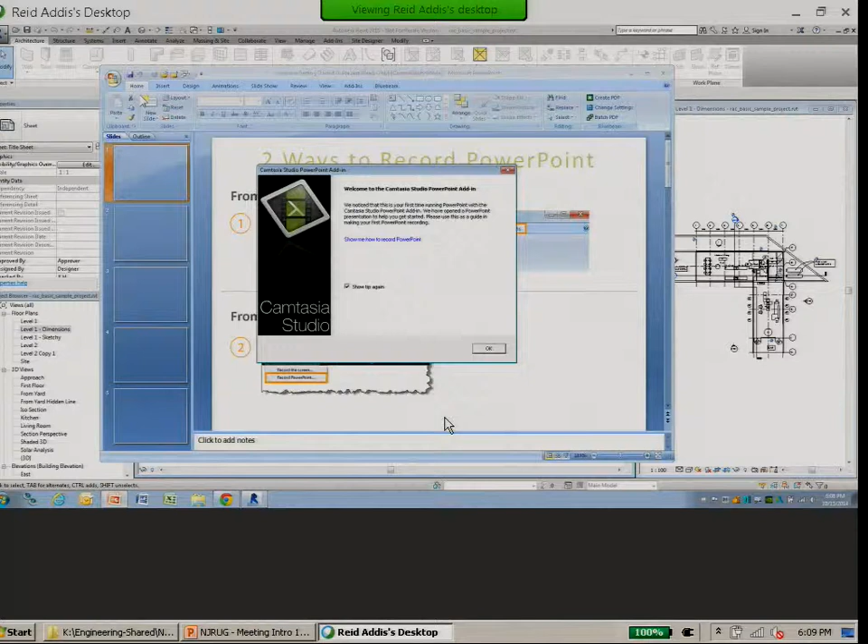Okay, let's see if we can get out of here. Is that one? Or not. And away we go, there we go. So it didn't like two PowerPoints trying to start up at the same time.

What the heck? So I'm Reid Addis, I'm a registered architect. We're dealing with Revit architecture, that's R-A, right? So coincidence?

I'm not sure. I was going to also start by saying that I'm probably the oldest guy in the room. I saw a couple other gray hair individuals. I'm 63, so I don't know, do I win? Do I or not? I'm close? Okay, so I like to introduce myself as the oldest guy in the room. In fact, I'm probably older than most people's fathers. Don't tell me I'm older than your grandfather, because that really hurts me.

I've been using the software a long time. I've been using Revit on and off since it was first introduced by a bunch of really dedicated people in Waltham, Massachusetts. When I went up there in 1999, I thought they were all out of their minds, right? All the drawings in one file, people sharing the same drawing, this was on machines that could barely do minor calculations. But Autodesk didn't think they were crazy, acquired them in 2002, and starting around 2006 it became a very viable product, the 8.1, and I've kind of been playing with it on and off since then.

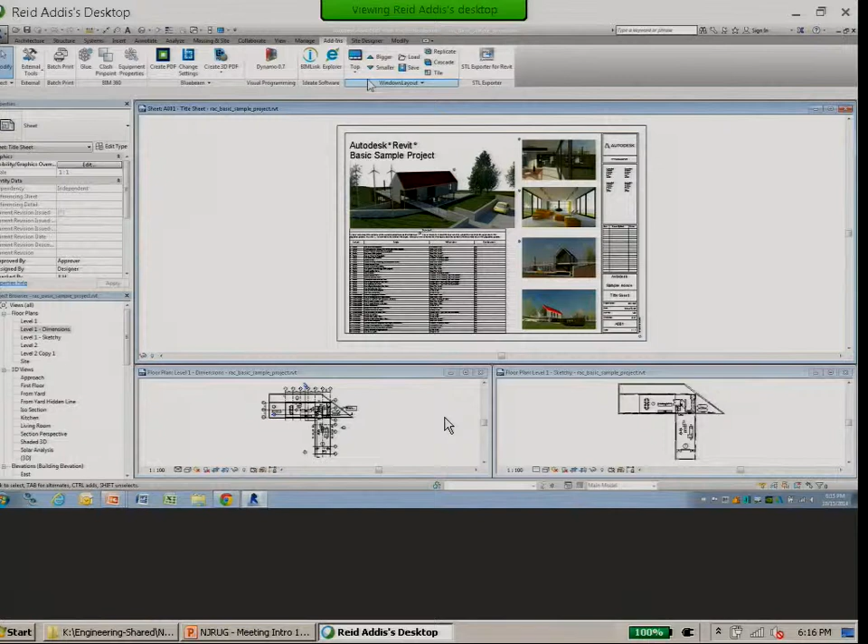Notice I'm able to quickly decide what I like. I can come over to add-ins and decide I'd like things a little bigger or smaller, or put things across the right or across the bottom. This is just the sweetest product, and it's free of charge. It's called Palladio X - look for it on the Apps Exchange store, the famous Italian architect with an X after his name. If you get approval from management, I highly recommend taking a look at this add-on.

Anyway, the sketchy lines feature was basically a visual graphics enhancement. Let's see if I can demonstrate this - does that show up on the screen? No, that doesn't show up. Okay, so there's this visual enhancement.

Let's see if this works - yes. Over here you can get to the graphic display options, either by clicking the edit button here or clicking down here, though it's a little faster to click at that particular point. There's a new section called sketchy lines, where you can enable it and adjust both the jitter and extension features.

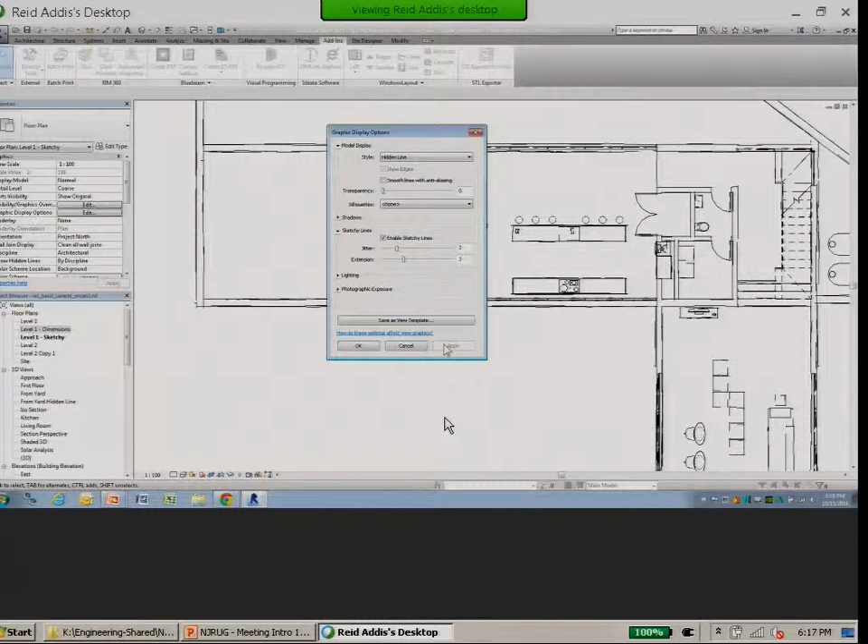You can play with these settings, and you'll notice it looks like after Warren's been in Starbucks a little too long. But you can adjust it to really what you like. I kind of thought, hey, sketchy lines, who really cares about that?

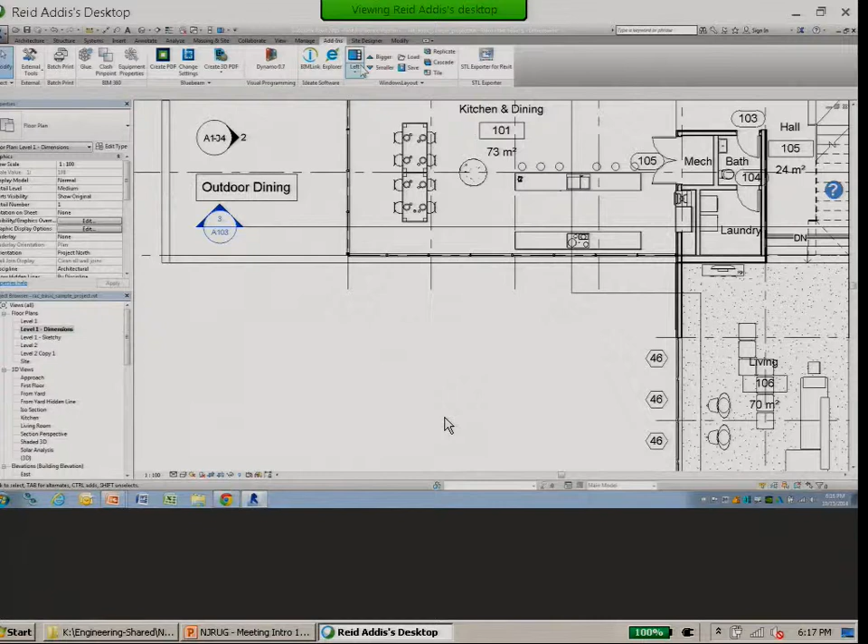But one of the things that's interesting about doing those kinds of drawings is taking a drawing that looks like this, and turning it into a drawing that looks like this instead. The idea is this gives it a less formal quality that you really can't get inside the Revit product itself, or even external to it.

When making presentations to clients or zoning boards - and I've presented to lots of different zoning boards in my career - a lot of them get persnickety when your drawing looks like it's 90% through CDs, assuming they're going to rubber stamp it as it goes through. So instead you can take your drawing, run it through sketchy lines, print that out, and take that to your presentations, or do the same for your client.

I guess the best line I ever heard about that was back when it was in AutoCAD. There was a guy in an office who used to do these nice sketchy line renderings by hand. I told him, look, I can now take my drawings and do sketchy lines. He said, oh, so you have a $6,000 product now that does what I do with a pencil.

I said, yeah, I guess so. But I can change my view faster than you can and get that sketchy line view. So sketchy lines is kind of a nice new feature.

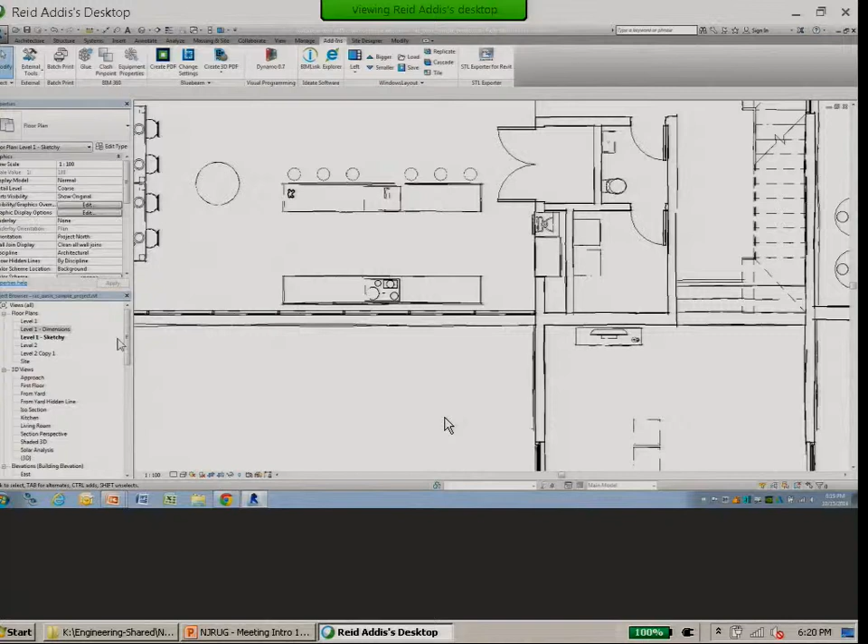Let me maximize this and take you into one of the 3D views. There's my kitchen view as a rendering. You now have the ability with ray tracing - again, one of the items at the bottom of the screen in display options for ray tracing. Ray tracing will start up, and I think they've just improved the performance.

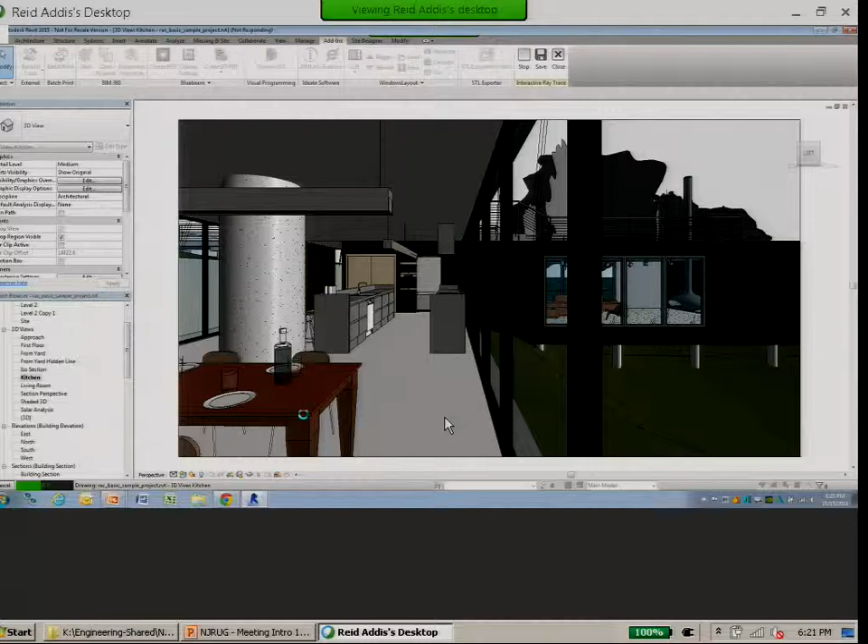The idea behind ray tracing is that it's going to bounce light around in your file, and it will continue to bounce the light forever. So you get this interactive rendering. It's progressing along at the bottom here, thinking about it. And there we go - it starts this interactive process of rendering the image, and ray tracing really never stops.

So at some point you can basically say you're done with that. It's not quite the same as rendering the image, but it gets you a fairly high quality material rendering without having to go through that rendering process and wait for the screen to finally update.

When you're done, you simply pick stop, and then you have the ability to save that into the file, export it, or simply close that out and move back to one of the other modes for the file. Okay, let's go on to the next one.

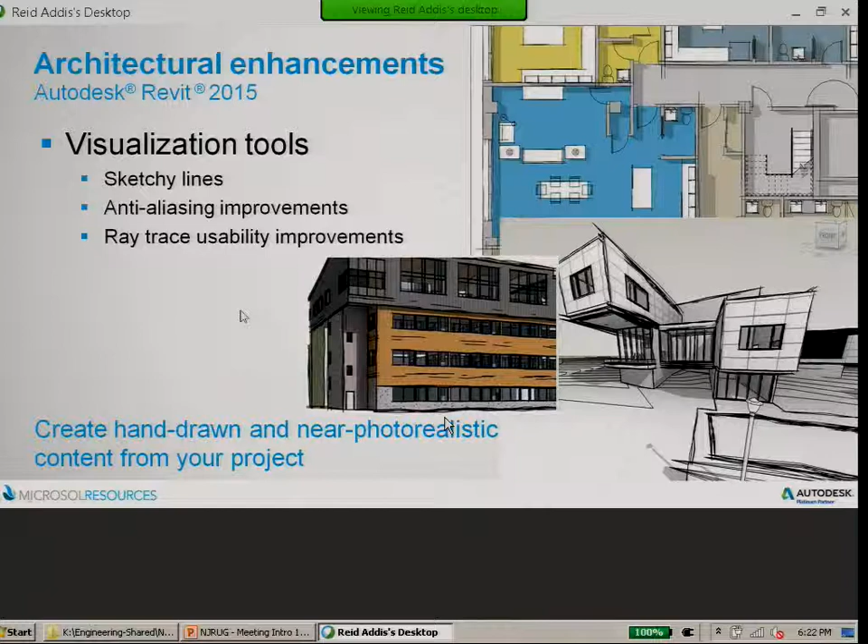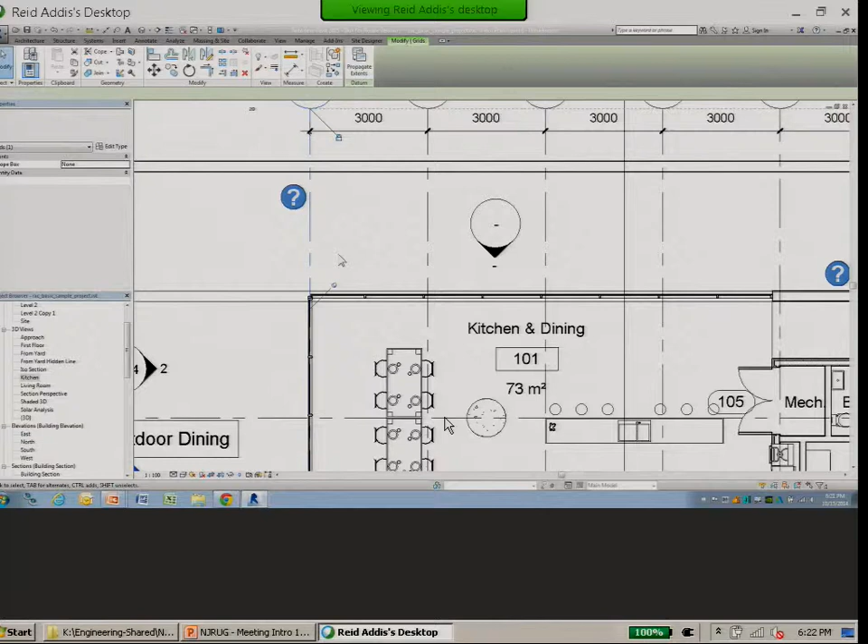With column grid lines, if you choose to pin the element - so now I've got that pinned - if you choose a couple of these and then go to delete them, it's not going to delete the one that you have pinned. That's kind of a nice feature. Now you don't have the ability to lock a layer like you do in AutoCAD, but when you've pinned the element, at least it's not going to delete it on you.

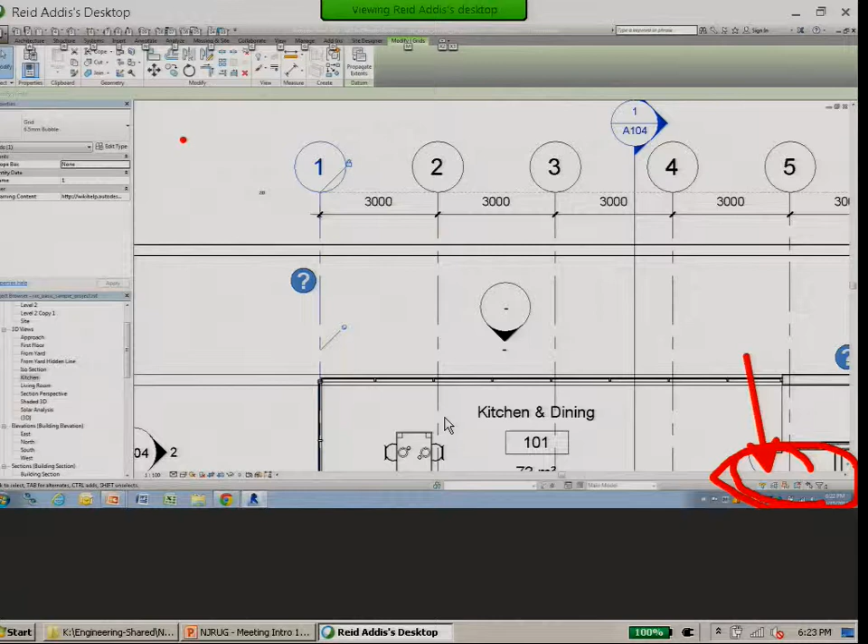The other thing you can do with pinned elements - this was added in the previous release - under the Modify button you also have an option to choose whether or not to select pinned elements, and that's also available down at the bottom of the screen. There are some little icons here, and you can do the same thing down here that you can do up under Select, choosing to not select pinned elements.

Another nice thing from the previous release you may not have noticed is select elements by face. If you're working in a drawing and trying to get this floor slab, you can't pick it directly, so you tab around trying to find the edges, same thing with ceiling grids. Now you can say select element by face and pick that surface directly. It's a really nice feature, but also very deadly if you're doing a window or crossing selection, because the first thing that happens is you pick on a face, and then it gets selected and moved or deleted - so just be aware of that.

So that's a slight improvement to the pinned element feature.

Family parameters. This is one that really works for everyone. You now have the ability to change the order of family parameters.

For anyone who's ever created any kind of family, you start putting your parameters in and you sort of hope maybe they'll go in alphabetic order. They don't really do that. Sometimes they sort in really weird ways. You're like, oh, I just thought of a new parameter to add, and it adds it in a totally different section, so it just becomes a nightmare of trying to find the right parameter.

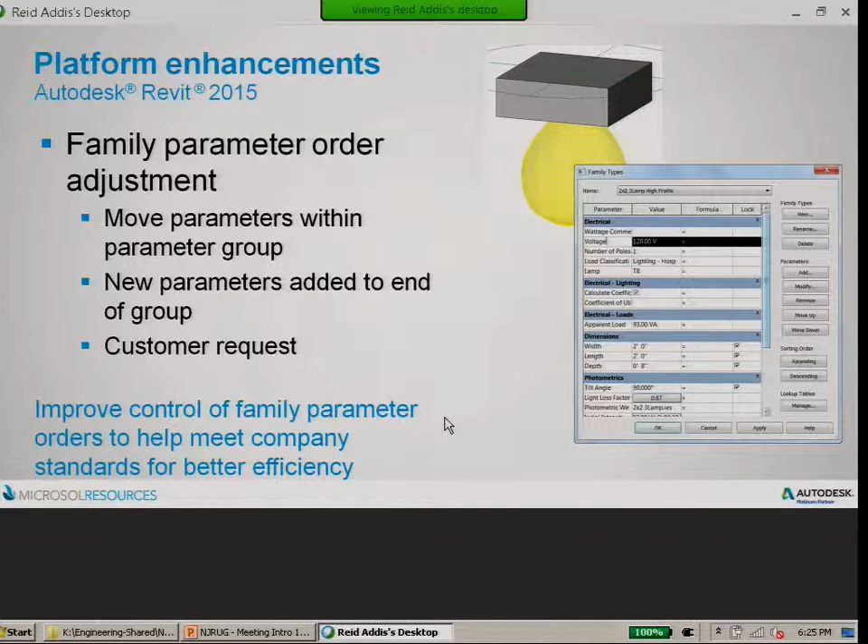You also have the ability to add help information to the parameters. Let me see if I can show you that. Let's look at a door here.

So with a door, looking at the type parameters, I'd love to zoom in for you, but it doesn't seem to pick it up. Darn, okay, so I've got the zoom feature on my laptop, and it doesn't pick it up here.

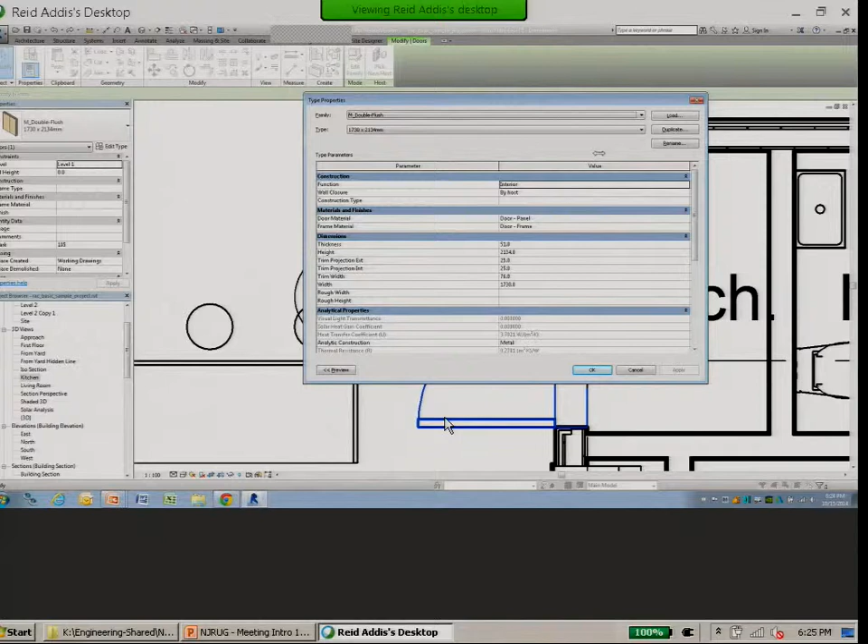You'll notice that for your door, I've got thickness, height, and then way down here I've got width. Most architects, we like it so that it's width, then height, and then thickness. So between height and width, I've got all this other stuff in there.

So one of the things you can do now is if I go over to edit the family and take a look at the properties, I'm able to pick the width option, and now I have move up. So I can actually move that to the top of the list, and move height next. So I've got width, height, and thickness.

That is really, really cool. If you've never done families, it's like, big deal. But if you've done families, or even tried to deal with families in your files, this is a huge improvement. I'm going to say okay to that.

I'm going to show you a little sneak preview of this guy here. We'll come back and talk about that in a minute. But I'll go ahead and load that into the project and overwrite the parameters.

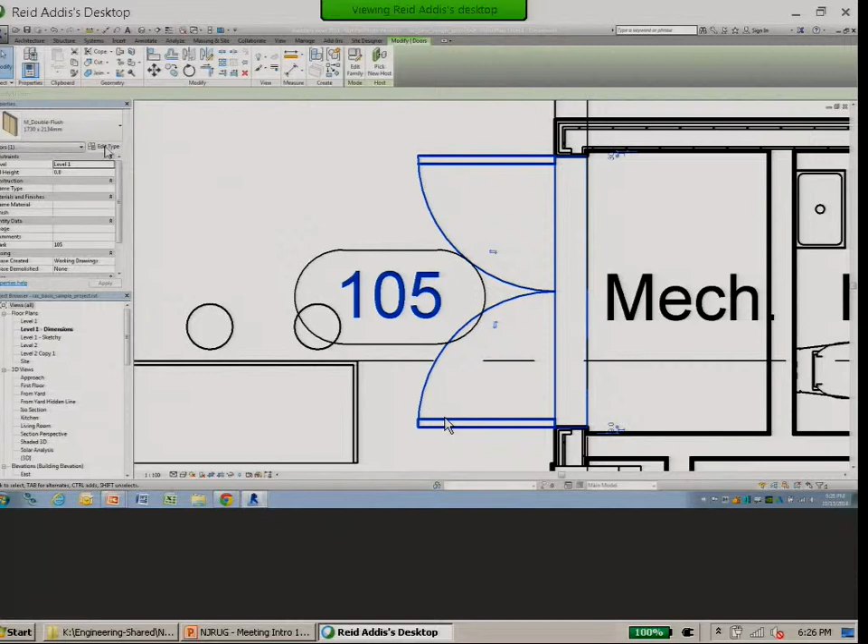And now if I pick that and go over and take a look at the edit type, I now have width, height, and thickness. So it's great—you can take these existing files, and now in 2015, you can open up and reorder the parameters really any way you want.

I know it seems like Reid is easily pleased, but I'm not really. That's really a pretty big item.

Okay, what do we got? Tooltips in family parameters—that's another thing you can do. As you're adding a parameter, you'll notice down here, I won't take you through that, but you've got the ability to add a tooltip. So why would you want to add a tooltip?

Well, you'll sometimes have some kind of formula in there, like half stair width, or beam minus coping, or something of that sort, and you're really trying to figure out what the person who created that was really thinking. Now you can add a little tooltip that explains, up to 250 characters, what that particular parameter was all about. So that's kind of a nice feature.

Okay, where are we going here? So there's a new feature for consistency with text leaders for our parameters, for tags, and there's a new parameter for elevation at top. One of the items people wanted was to be able to, instead of having it to the left or right, put that information instead of underneath the word 'level' over here, to actually add the parameter over there.

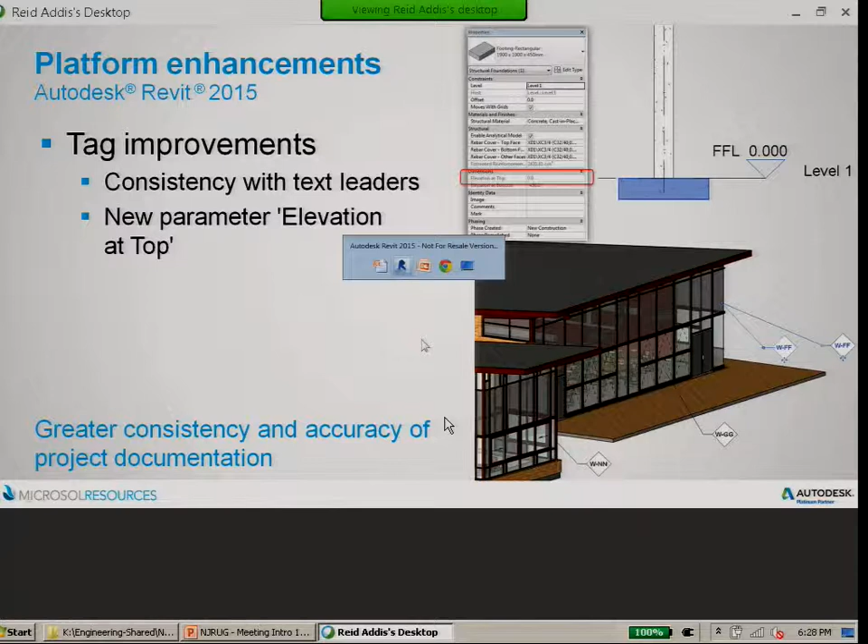One of the tag things had to do with dragging out your tags and trying to have the elbow kind of come with it. Let me see if I can work with this. Let's see if I can take this guy and add a leader to that. So let me grab and move that over.

When we moved that around in previous releases, there were kind of issues with the elbow not staying exactly where it was supposed to, the same way it did with a text leader. Again, doesn't seem like a really big item, but it's a nice fit-and-finish item that was added in this release. Just take that off and move it on over. Okay.

So enhanced schedules and material takeoffs, views on sheets, duplicate views, and view references. Let me show you what goes on with the enhanced schedule and material takeoffs.

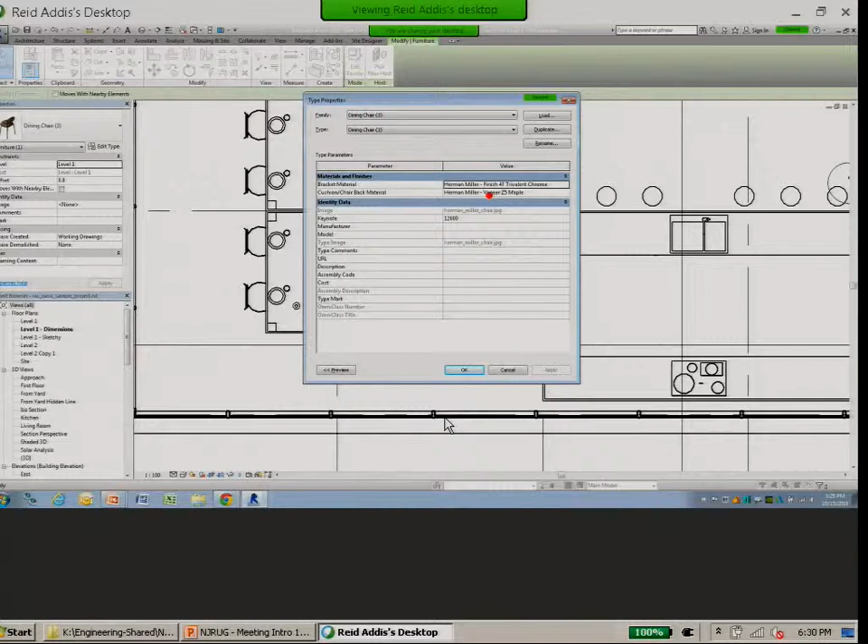In the schedules now, you have the ability, for instance with this particular chair, if I go over and look at the type, you'll notice that I have the ability to add a couple of different images. One is an image, and then there's a type image that you can add. You do that basically in the family file, by opening it in the family editor and looking in the properties.

One thing that threw me off: when you get to 2015, you get this image field, but there's no identity data visible, so where do you add that? I searched and searched, and it turned out all that stuff was under identity data, but hidden because an arrow was pointing down instead of up. By default they hide all the parameters. So if you're looking for where all this stuff is, just click that little button and it'll help you out.

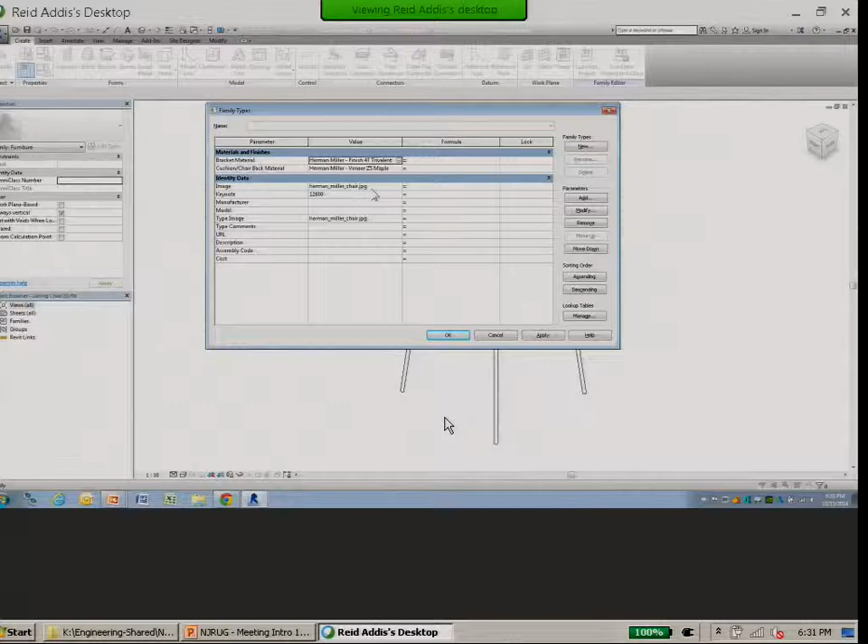You also have the ability to save images. All I did was go to Herman Miller's website and download images of their chair. Then there's an ellipsis button that lets you choose the image you want. There are certain restrictions suggested on the size and pixels of that image, and then that's something you can schedule.

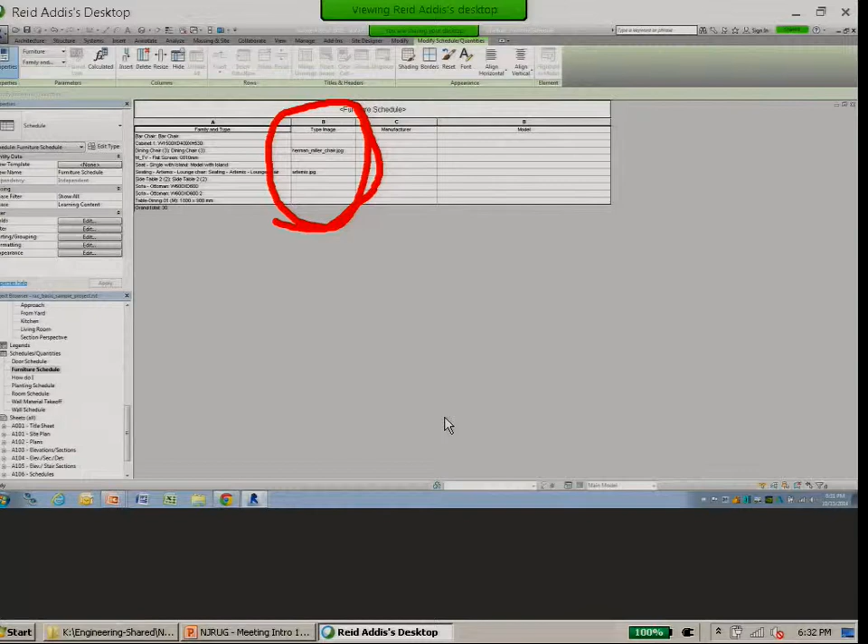Let me go ahead and close this, so that can be scheduled. If I come down into the schedules and go to the furniture schedule, I have those listed here. If I look at the parameters, one of the parameters I added was type image, and you might think that's not a very interesting image, right?

It doesn't actually display the image in the schedule itself. It only displays the image once it's finally placed onto a sheet. So when you finally get that schedule onto a sheet, the image shows up.

That could be useful for people doing interiors work. It could also be useful for mechanical products if you're trying to show a certain valve, fitting, or structural connection. You have the ability to do that now, and it's as easy as saving an image as a PNG file of a certain size and adding it to the family's parameter. I found that type image works better than image, so set it as the type image for that family, and it comes through when you place it on the sheet. Very nice.

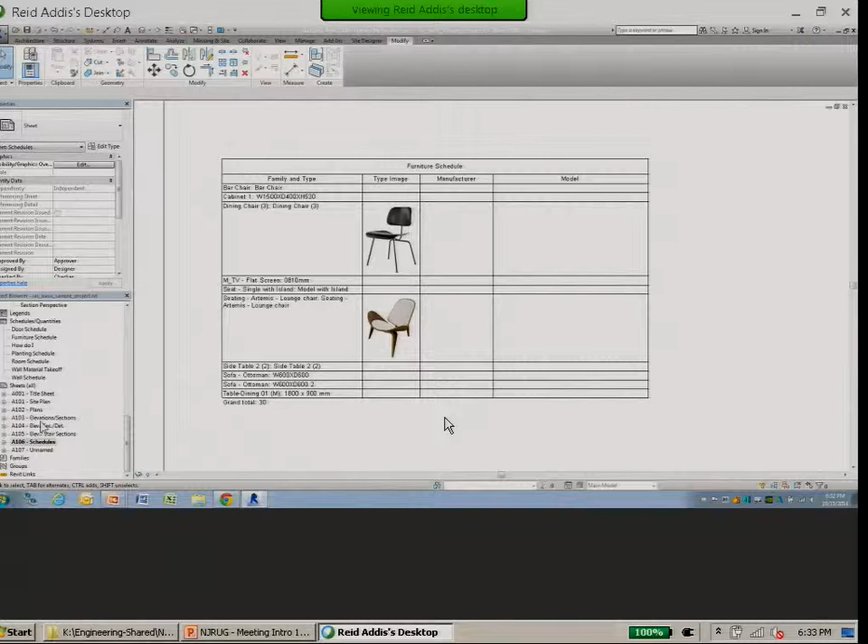Now, views on sheets. Let's go over to our sheets. One of the things added in a previous release was the ability to double-click inside one of your views to activate it. But in the past, to deactivate the view, you used to have to right-click and pick deactivate view. If you're not a right-click person, the answer is always right-click if you can't find something, right?

New users will call up and say everything's grayed out, I can't do anything, I don't understand—oh yeah, you have to right-click. For those of us from the AutoCAD world, I compare these to viewports on sheets, and in AutoCAD you just double-click outside the viewport. So why can't Revit do that? Well, Revit does that now in 2015. It sounds like, what's the big deal, AutoCAD had that for years, but it's actually a big deal at this point.

So you have the ability to just double-click inside or outside of a view to activate or deactivate it. Another thing—I know it sounds picky, but let me get rid of this over here. I wish it would zoom on my screen, but it doesn't, so we'll deal with it. Over here you see I've got Level 2.

I'm going to delete this copy. So we have Level 2, and if you wanted to make a copy of a view, you would right-click and say duplicate view, right?

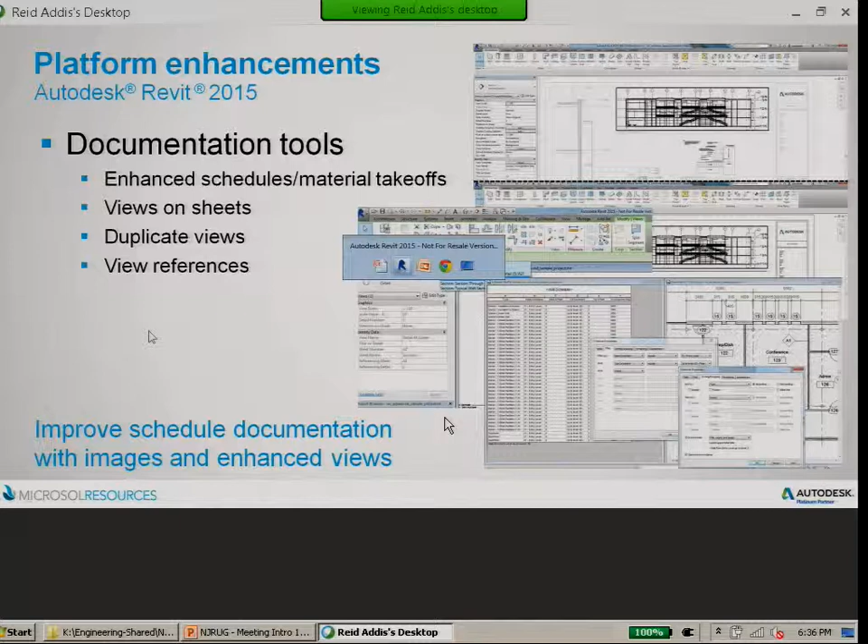Let's come back to here - images and schedules. Oh, I did that already. So, okay.

Couple of minor things - assembly codes are now available. Assembly code settings are now available if you're actually using those for working with, let's say, either scheduling or tying into external programs that produce specifications.

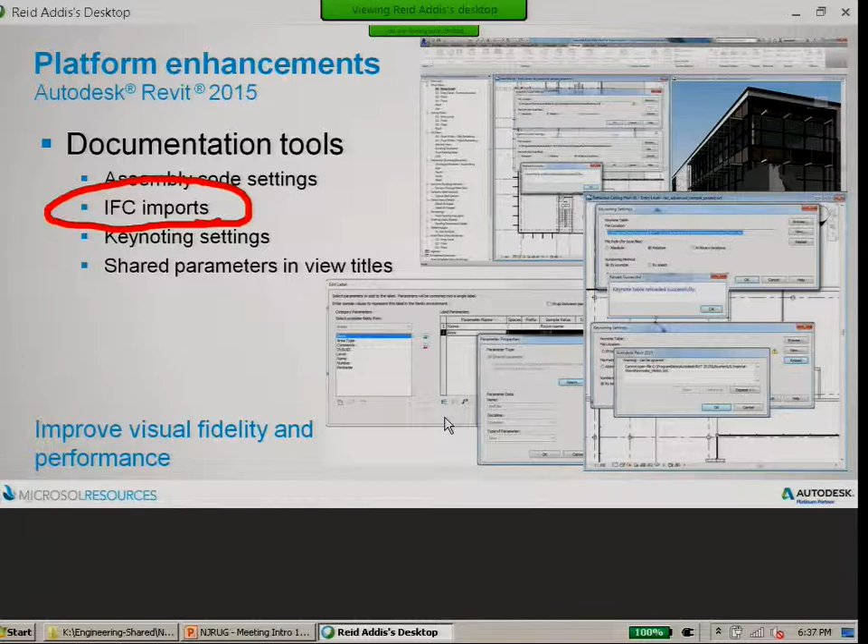Another thing you can do is actually import IFC files now. I don't actually have an IFC file, but instead of linking it in, you can now bring it in just like you can bring in a CAD document. Now, you weren't able to work with phasing - someone asked, well, if I bring that in, am I able to do phasing? I think you'll see in a little bit that there's some abilities - it's either that or work sets. You have the ability to do some additional manipulation in the subscription update.

Some changes in the keynote settings, and you can now have shared parameters in view titles. So you've got those particular changes as well.

Hidden lines - I haven't decided how I feel about this one yet, but I'm going to show it to you. There's some neat new things they've done to help improve, potentially, being able to see through your model, but not have it be in hidden line mode.

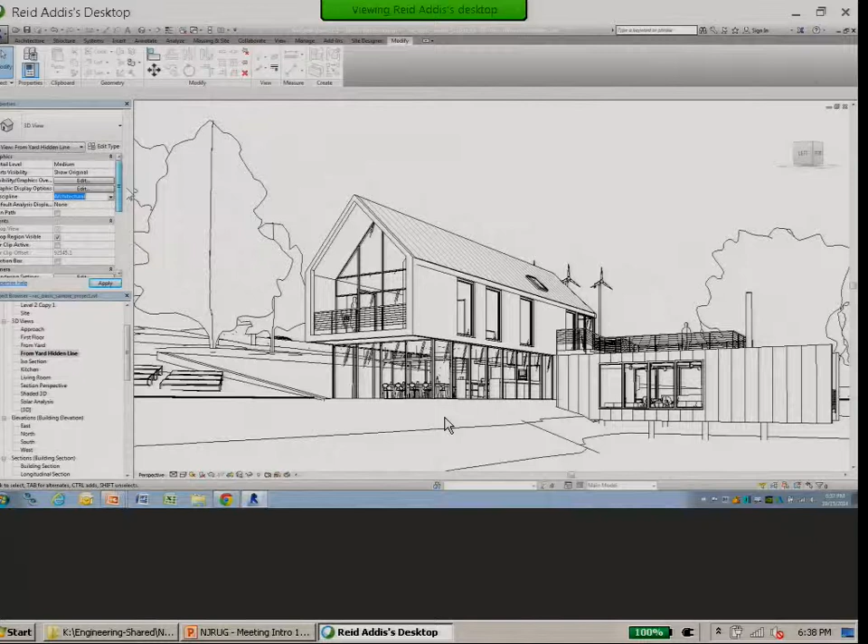Let me take you into a view we've got. I think I've got an isometric in here. Can I do this one? Let's see what we got - architectural. Let's come down to... I'm not going to be able to do it in that particular view. Let's do it. Let me get to an isometric. I'm not going to get to an isometric. Let me go to my 3D view.

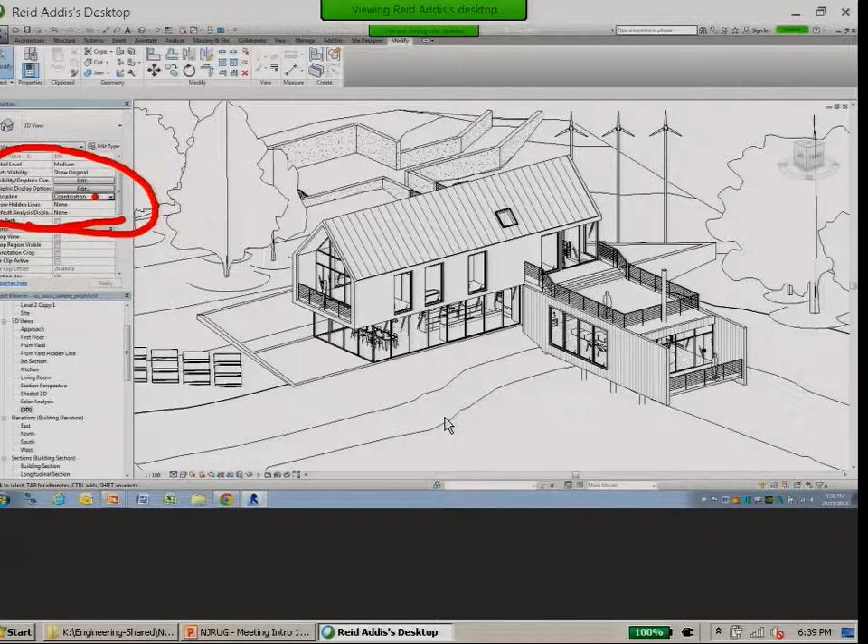There we go. Okay, so in my isometric view I've got some additional options called show hidden lines and discipline. Let me circle that. So show hidden lines - the discipline is currently set to coordination, show hidden lines is currently set to none. You have the ability to control that to say, by discipline.

When you do something like that, you can pick an object - let's say this particular roof - and then on the view tab you have the ability, well, let me turn on show hidden lines. I can pick the roof, and then I can pick the item, say, this particular wall there. Did I get that? Well, I'm set to coordination - let's see if we can do it architectural. Okay, so let's say pick this.

Yes, let me pick this, and then let me pick this wall. There we go. So you're now seeing, architecturally, you can see that wall through the roof. Or let me see if I can pick this wall here, and then pick this interior wall, right?

So you can start to do those sorts of things where you can selectively choose which ones you want to show. You can also choose to remove the hidden line, basically reversing that same process to remove items one at a time. Or you can simply say, just show me everything, and pick all. Then it shows you everything that's hidden by everything else in terms of the disciplines.

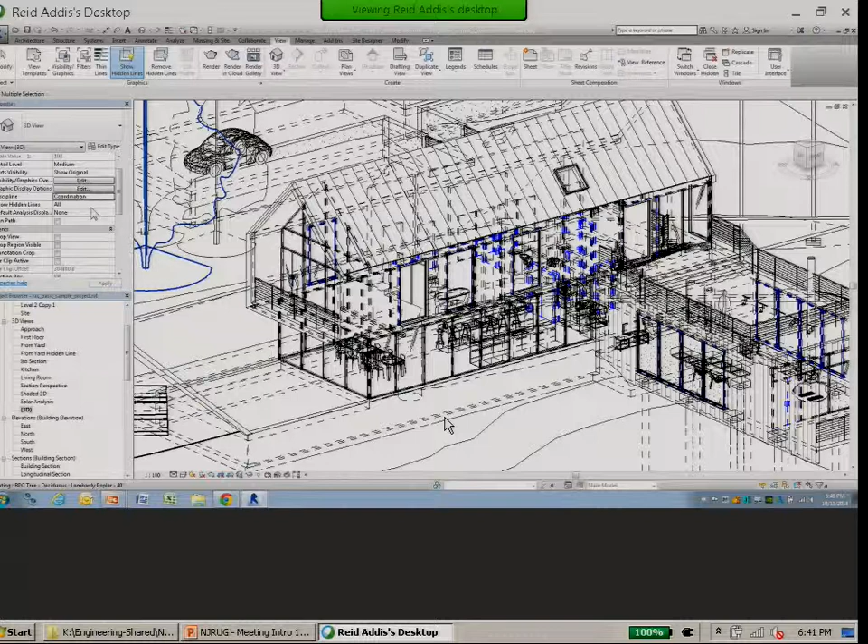Let me see if I go down to coordination, right? That one isn't quite as useful as it could be, but if you do by discipline, it gives you that ability to selectively choose the elements that you want to have show through. I haven't figured out a complete use for that yet, but I'm sure there's something.

Let's see if we can get back into the PowerPoint. Revision improvements - I'm not gonna go through all of these.

There is the ability now, in the past you really weren't able to delete revisions, and now you have that ability. So there's been a button added for deleting. There are more tools for sketching revision clouds, and then there's a minimum arc distance. Haven't used that one in a while.

Let me just see if I can come back to, let's say, level 1. So on the Annotate tab, you've got your revision cloud, and I believe the settings for that.

So you've got the ability to place the revision cloud. You also have the ability to just simply draw it, so I can simply draw a series of arcs if I want. Well, except I wanted to go the other direction, right? So you have the ability to make these picks and create these arcs, right?

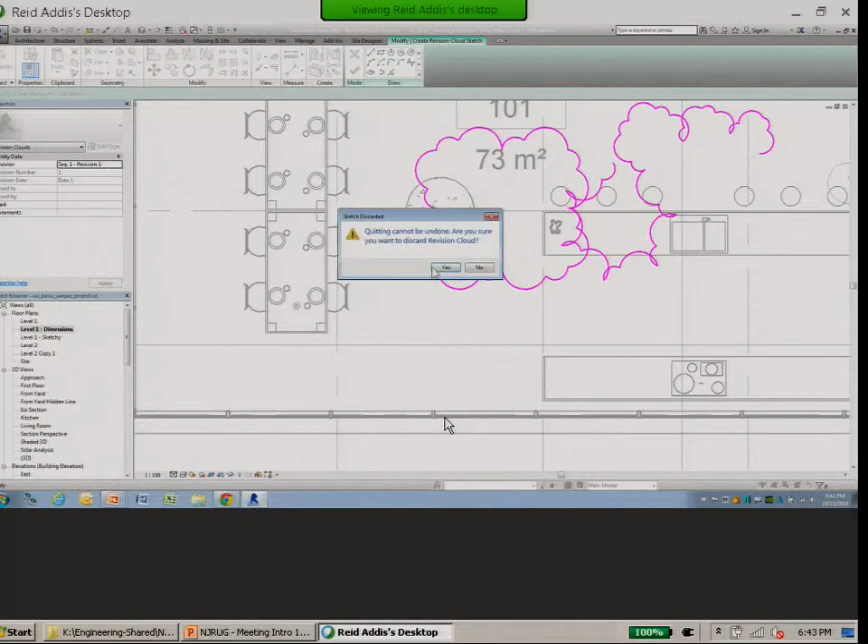So let me go ahead and close out of that and say no, I don't want to do that. People were asking, can I make different shapes and can I control the size of the revision cloud? The answer is yes, you can do that in this release.

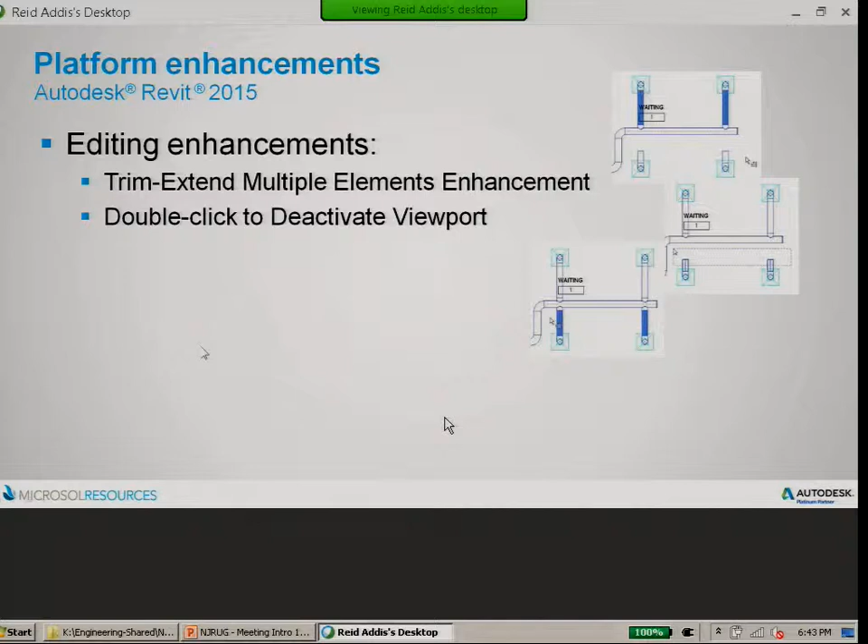Okay, so we talked about deactivating the view, double-clicking. Trim extend multiple elements - this, while it doesn't seem like a major improvement, does create the ability to do things a little more efficiently than you were in the past.

So just to illustrate it with some walls, if I draw a couple of walls in here, let me just put this guy in here, and then I'll place one here. Let me place another one here. Place another one, let's say here.

So in the past, if you were trying to do the multi-trim on the Modify tab, you had the single line trim extend and you had the multiple trim extend. In the past, what you had to do is pick your start element, and then you had to pick your other elements individually. Now you can just do a crossing through them all, and they all trim back or extend to.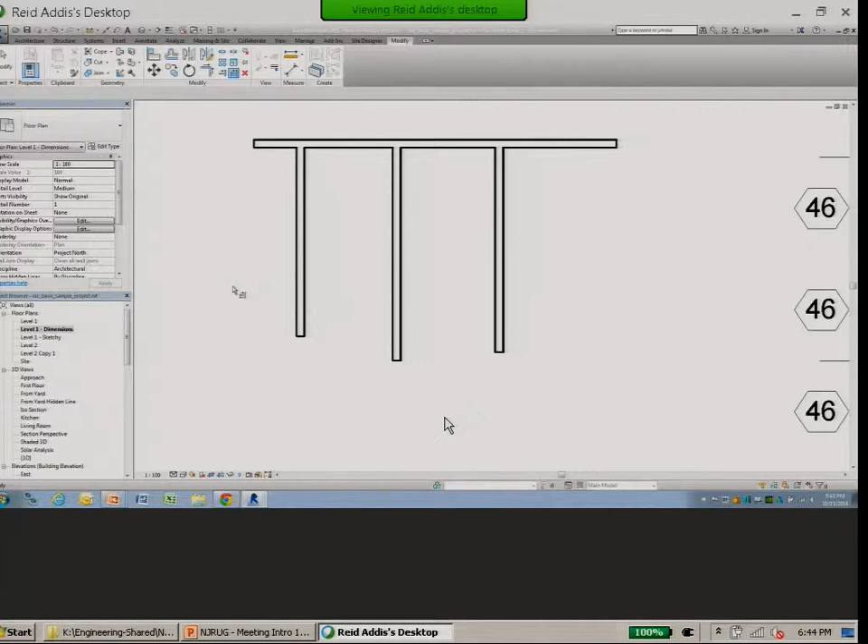And again, you're like, yeah, well, I was able to do that for years in AutoCAD, but you weren't ever able to do that before in Revit. So some of that resistance and frustration you had initially moving over is now gone. It's more of a fit and finish than some extraordinarily major enhancement like tabbing your palettes, but again, every little bit helps during the day.

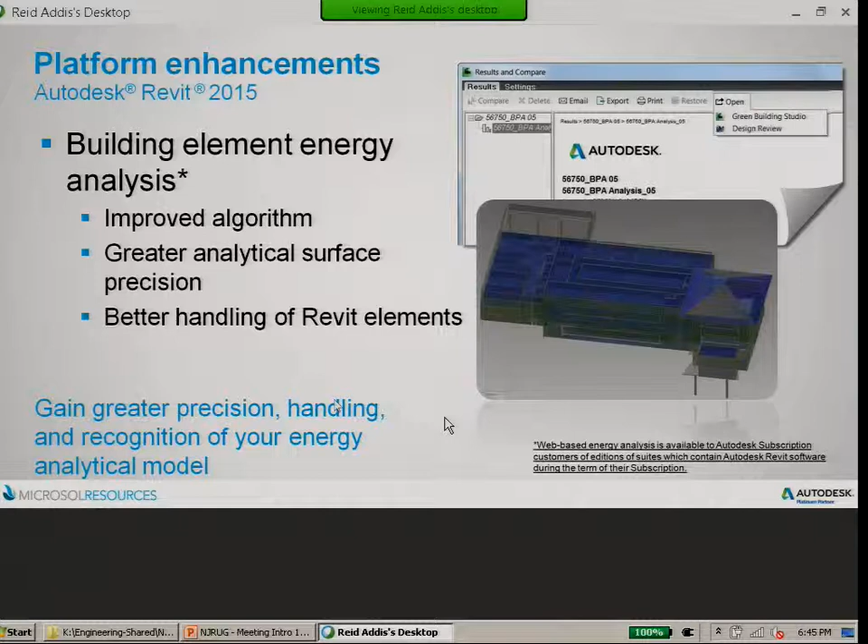Okay, building analysis. If you're doing any kind of energy analysis, they've improved the algorithms. In the previous release, they actually changed things around a little bit. So if you were using previous versions of Revit before 2014, it really didn't want you to do anything other than have very, very large rooms or spaces to do your calculations.

And now on the Analyze tab, under the calculations, you have the ability to either use conceptual mass mode, or you can now use the building element mode. And through using Green Building Studio Online through Autodesk 360, you can actually export your energy calculations and run those all on the web. It's now all web-based.

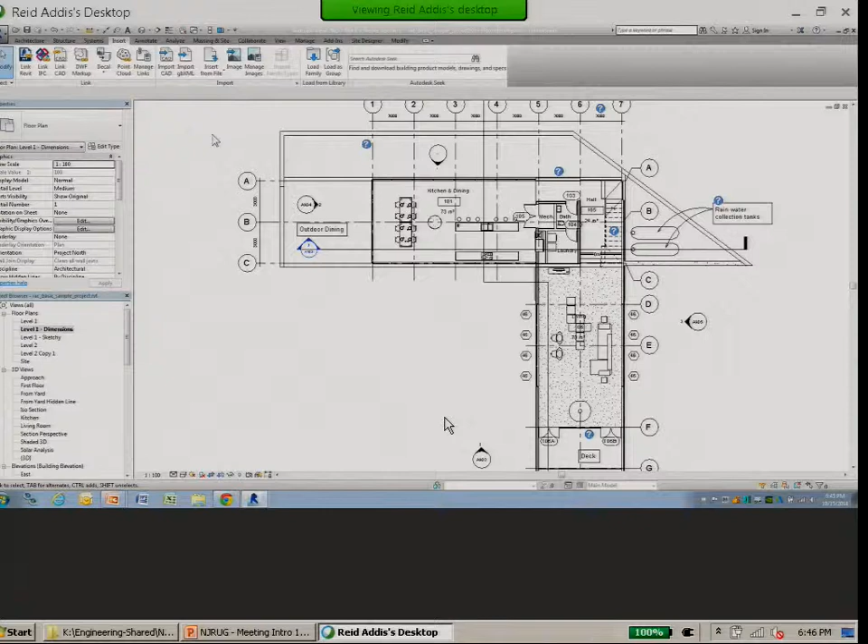Again, IFC linking - there's a new tab in the Manage Links dialog box for that. It doesn't seem like a big deal, but prior to 2015, to add a link, you went to the Insert tab, then Manage Links, chose to link a Revit file, and had to go find that file, working through two different dialog boxes. Now they've added the Add button, so you can simply add your links right in there. Might seem minor, but for usability, if you're using links - and most people in a multidiscipline place are - it can make your life a little easier.

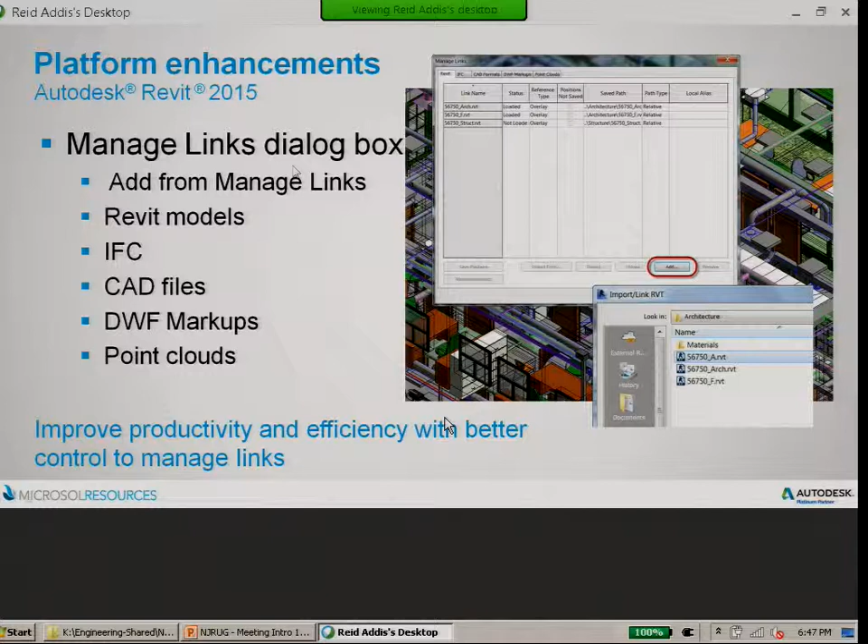Okay, so all of those were in there. Now we get into the subscription update. Some of these things I haven't played with, some of these things I have.

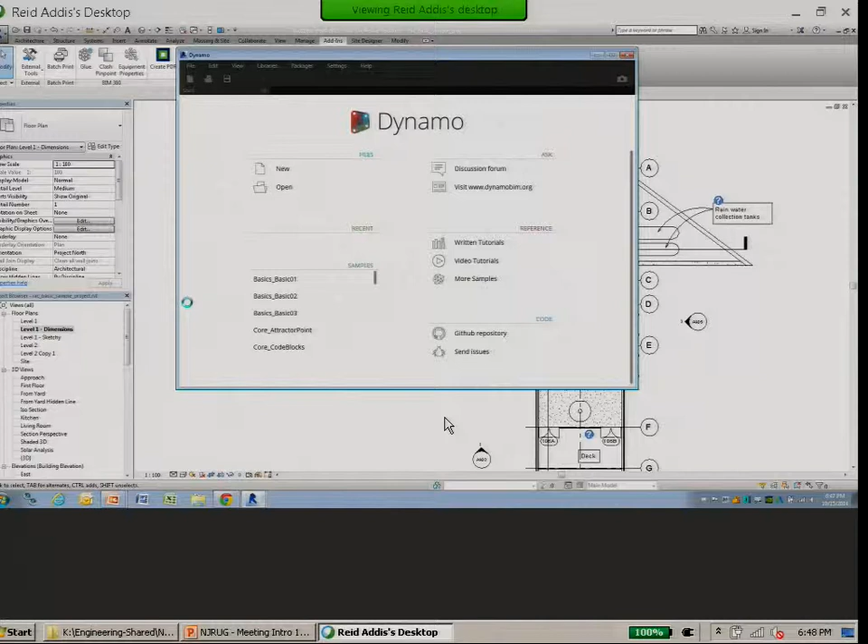So Dynamo - it's kind of in the Autodesk labs. I don't know if anyone's played with it, but it's an interactive design tool, basically visual scripting. It allows you to drag things around within the dialog box, and it actually affects what your building looks like. That's under the add-ins, called Dynamo 0.7 Visual Programming. Some people have been playing with it, some haven't, like me. But you get this dialog box that had been in the labs before, letting you create shapes and drag things around on screen to design. So no more sketching on napkins - now you're doing electronic sketching. That's built into the product.

Another thing added in the release was this web-based environment for managing environmental collaboration through Green Building Studio. That was an external program, and there have been changes in energy analysis - several methods added inside Green Building Studio as well in this release.

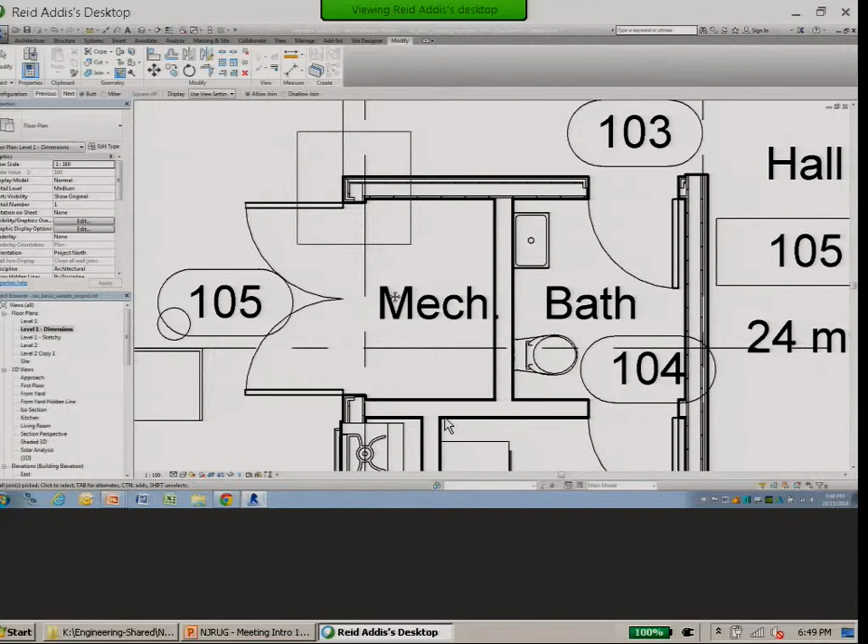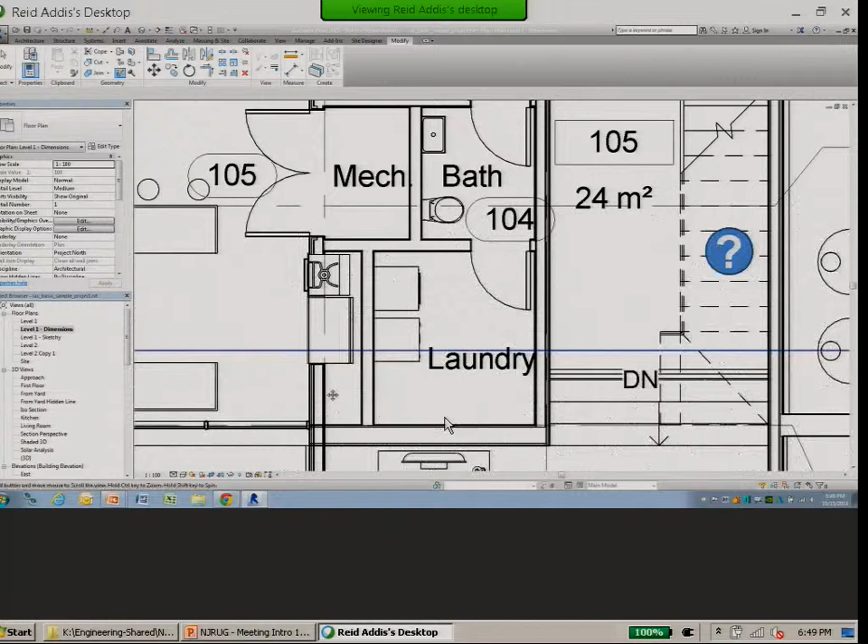Wall joins - one thing that occurs when walls connect, either at corners or intersections, is that there's always some kind of join. You can see here the vertical wall is winning over the horizontal wall, or this particular join is coming to the middle. To do wall joins, under the Modify tab you used to have to pick the wall join tool and hover over that particular join. But if you wanted to do more than one, you couldn't. Now, if you hold down the control key, you have the ability to select multiple wall joins. Might not seem major, but if you had 3 or 4 wall joins you wanted to change from one winning to the other, you can now make multiple changes at once instead of one at a time. It was a requested item - that was added, but only in the update 4 subscription, so if you're not on subscription, you don't get that feature.

IFC references and phases - now in your linked model, you're able to use that for alignment references, you can dimension, you can snap, and it will host some face-based families with a linked IFC model. The other thing it can do is you now can control phasing inside of that, and that was asked just a couple months ago. One of our clients asked if you could control phasing in the IFC model, because when it comes in, you might have core and shell and tenant fit out, and you've got this IFC model of the existing building produced by someone else, with no way to turn things off - and you can now do that.

Shaft openings - not a big deal, but the base constraint value, if you're doing a shaft opening, now defaults to the level of the current activated plan view. Also the instance properties have been reordered. When creating shafts on the architecture tab, the parameters used to be all messed up, totally out of order - people had the top constraint above the bottom constraint, setting things willy-nilly. Now they have base constraint, base offset, top constraint, top offset - they've reordered things. It's one of those things that just makes life a little bit easier for all of us.

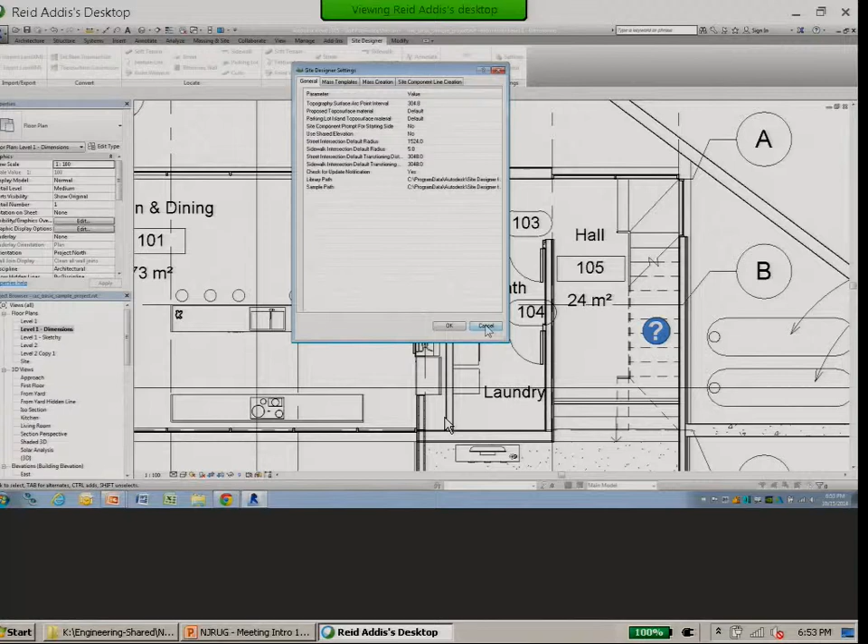If you actually looked at settings, there are lots and lots of settings in here too. So yeah, this is not where you just come in and start drawing a couple of lines around and moving it. Really, it's actually better if you have a bit of a civil background. But it's kind of a nice bonus, and I think you're going to see more and more people taking advantage of that nice add-on that you got with subscription.

Perspective views. When I'm doing training and creating perspective views, when you go to create a perspective view, there's a little checkbox on the option bar that says perspective. So, well, of course I want to create a perspective, right? So if you uncheck that, you get an orthographic projection, and that's the end of it, right? So you get a perspective projection, and there's no way to work with that.

What you have the ability to do now is you can right-click and tell it to switch to an orthographic projection. You can also now edit in perspective - you can actually pick elements and move them around. You can pin and unpin elements, and align different elements in there. You can also reset the camera target to the center of the vision or field of that particular view.

So let's see if I can bring up a perspective view. Some of the perspective views let me do it, and some of them don't. I haven't fully... of course, I picked the one that's not the perspective view. How about this one? There we go - so there's my perspective view.

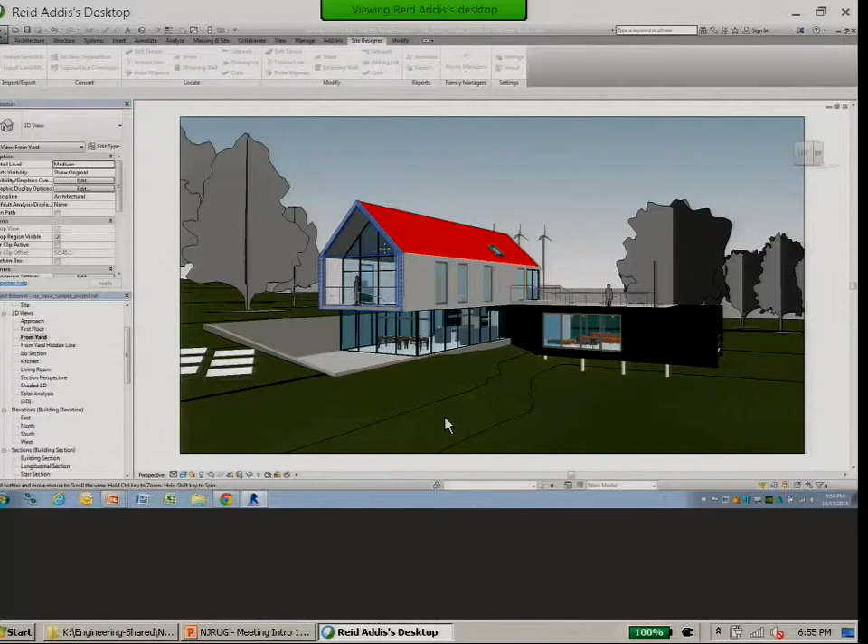Beautiful perspective view, right? And at the bottom here, by the way, if you missed this in a previous release - 2014, I think - you were able to lock your 3D views so you wouldn't lose the image. So you had that ability. In this particular release now, this is update 4.

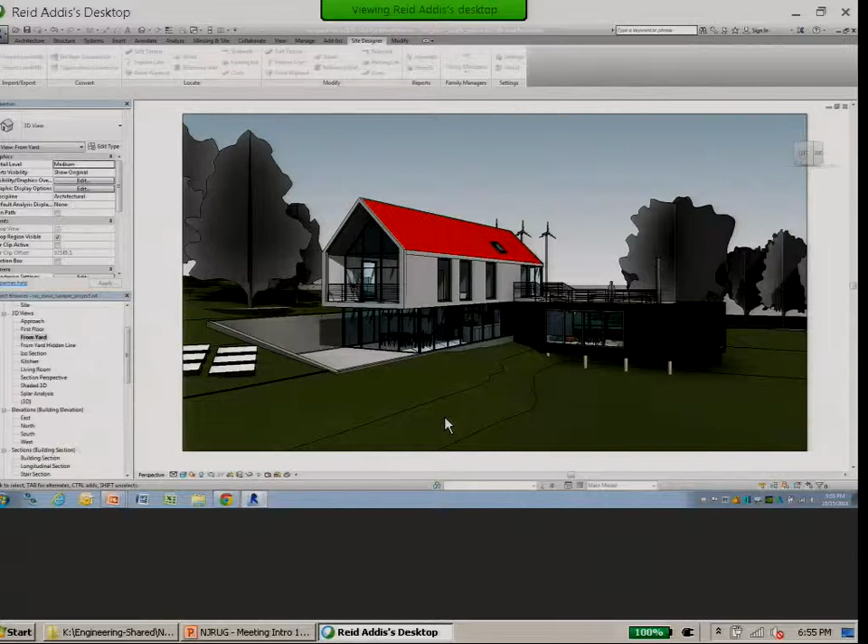You have the ability to go to the view cube, and like you could in AutoCAD, you can right-click, and there's now a toggle to parallel 3D view. So you can very quickly now go to basically an isometric view. This is where you now get your - let's see if I can get back to manage, modify - so this is where you can get to your modify tools if you want.

And then when you're done playing with it, you can now come in and right-click and say toggle to perspective view. So that is kind of a major deal in this particular release, being able to switch back and forth from that point of view.

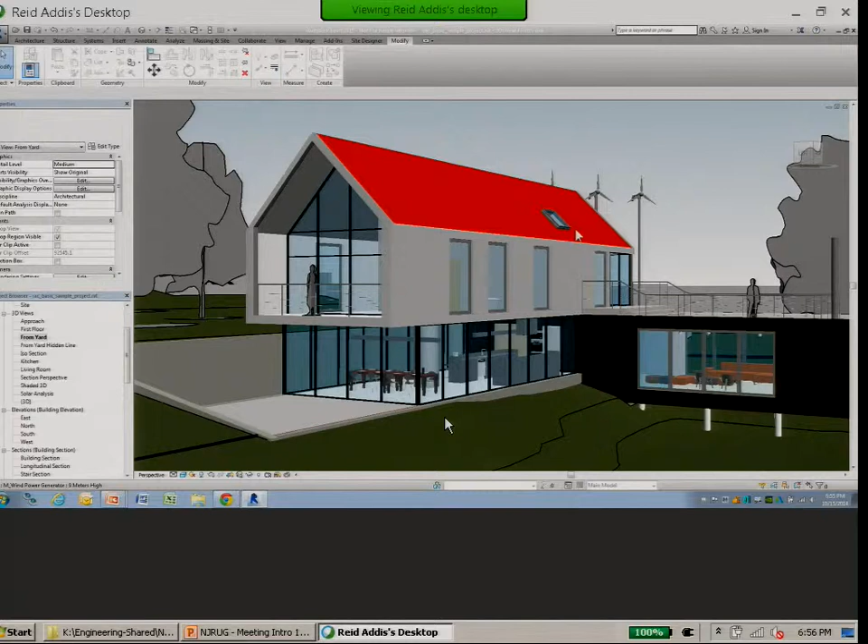Edit target, or reset the target. So if I came in and started playing with this - if I do F8, ooh, that's F9, let's try F8 - and I come here and say let's orbit a little bit, and maybe I'll look this way or something. I now have the ability to pick the edge of the view, and there's this option now called reset target. So if I click reset target, it now resets the target to the center of the view.

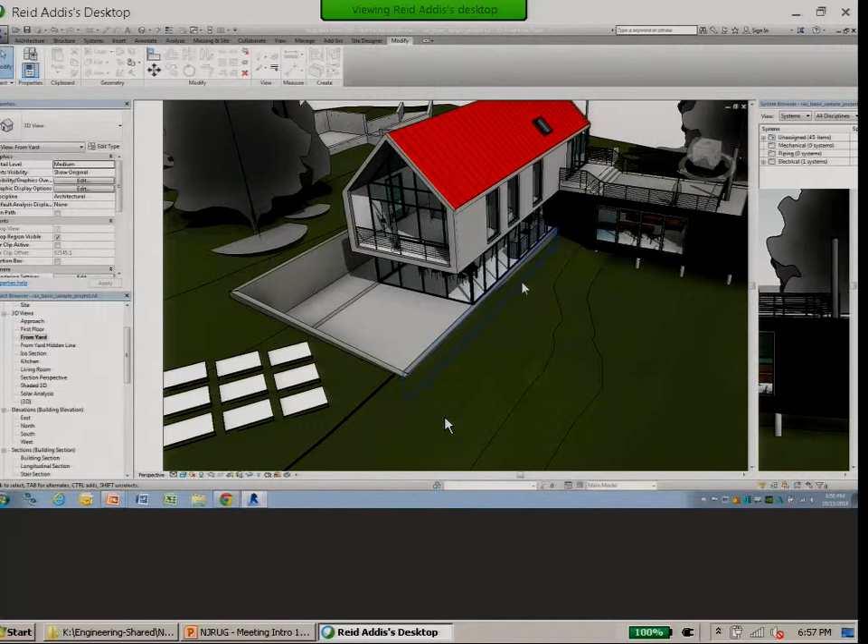If I can pick that - doesn't look like it actually changed much there. Okay, well it didn't really, I guess I haven't actually moved. Let's see if I move - F8 - I would have to do what? I'm just trying to think of how I might change the view.

See if that does it. Probably not going to show me. Yeah, it's not actually changing it. But you can get it to do that again if you simply pick the edge of the view and tell it to reset the target. Of course, it's not going to work for me at the moment. Let's go ahead and close this guy over here.

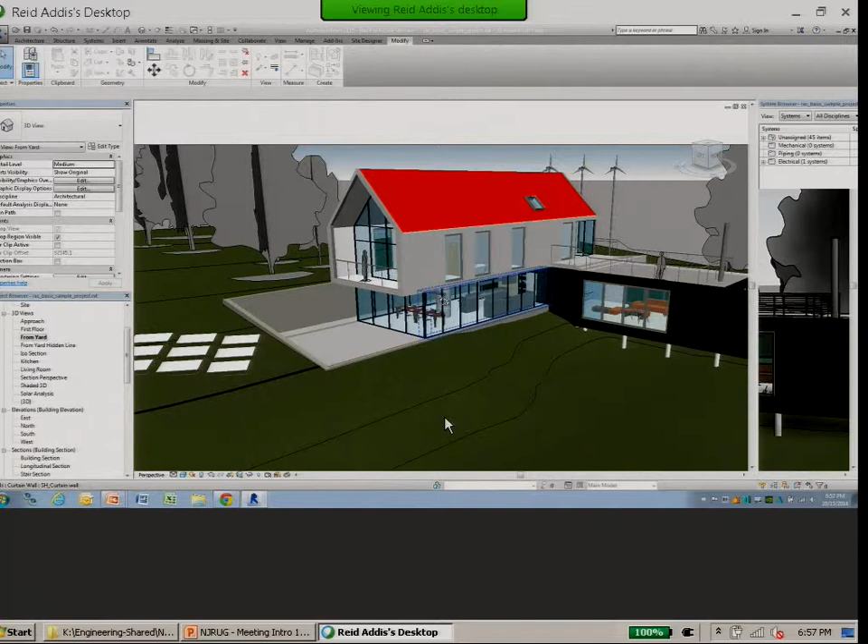So you have that ability. If you've messed up your view or you want to reset the target to the center of the view, you can do that. Again, you can toggle back and forth.

Oh, search methods. Some of the interesting things - you used to be able to do search for views, but now you have the ability to search when you're creating a callout view or when you're doing component placement. So for instance, if I were trying to reference another view, let me go to the first floor plan.

And I were trying to create a callout view. Let me close some of my hidden views. Okay, so if I'm trying to create a callout view on the View tab, and I choose the callout tool, you'll notice that under reference another view, you have a lot of views in the drop-down list, but you have the ability now with a search to say that you just want to look for certain things.

Like I could start with FL, right? And immediately it starts to sort my list. One of the things I noticed when I was working on a project with a client in Washington, D.C., is that they had dozens and dozens of callout views. So when they were trying to do these references to other views, they would get this long list, and they'd say, I'm not quite sure if it's this one or that one. You can now shorten that list to a much finer level of accuracy rather than having to scroll through them.

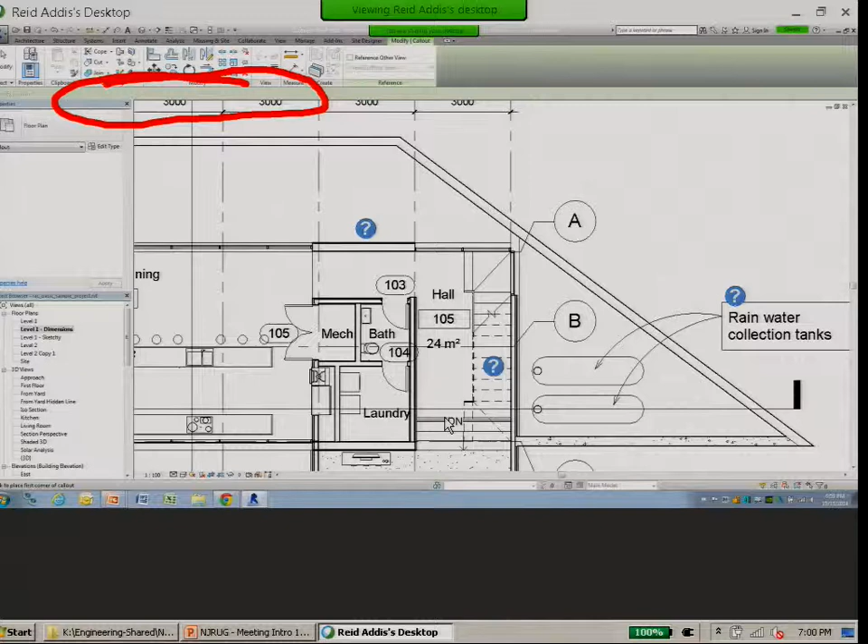Another thing that was added in the previous release of the software, and you might not be aware of it - at least I'm pretty sure it was in the previous release - is when you are referencing a callout now, when you go to place a callout... oh, and the other thing is that the reference another view option used to be on the option bar, and in the update they moved it up to here. So what would happen was that if you referenced another view and chose that view, you could never change it. So if you referenced the wrong view in the list, meant to do A2 instead of A2.1, you basically had to delete the callout and start over again. That was added, I think in 2014, the ability to basically just change your reference view. So that was kind of a huge addition.

But now you have that search feature. The other thing you also have is now when you're placing components - let's say I'm looking for a particular type of component, I have my drop-down list, and it's like, I've got trees, and I've got light fixtures, and I've got toilets, and I've got all this stuff in here, right? So you're scrolling and scrolling and scrolling.

Now there's this little search item here, right? So if I start with the letter W, it just brings up all of the items that have W in there. Or if I start with, I don't know if there's one that starts with P or not, but it looks for that particular letter, searching through and finding just the items that conform to that particular set of characters you're looking for. Again, makes it a little bit easier for searching. It's not quite tool palettes where you can choose to have only plumbing fixtures or only structural elements or mechanical items, but the search item is certainly going to make it a lot easier to find what you're looking for rather than scrolling through that list.

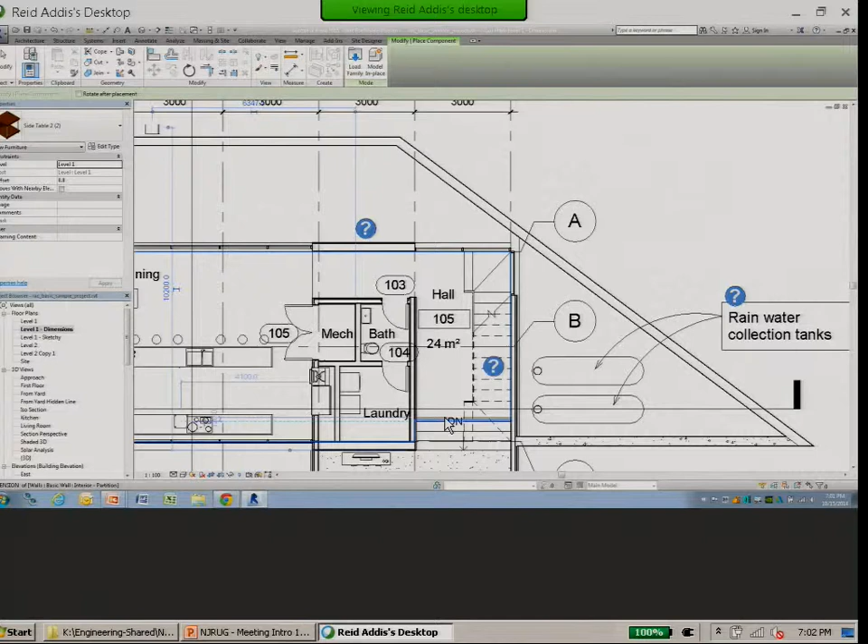Again, that's in the subscription only. Reveal constraints. So whenever we constrained one object against another, there was really sort of no way to know what was constraining what without actually selecting that particular element. And then you would see this little constraint lock, but it wouldn't always tell you what was constrained to what. So in this particular release, let's see if I can just make this work on level 2.

Let me work with level 2. I'm going to go into here and take out the colors.

Let's say I would like to take this column line and align it with the edge of the door. Probably a better idea to line the door with the edge of the column, but I don't have enough room at that particular point with the door. Actually, maybe if I move this guy up a little bit, that might work better. So let's take this door and say we want to align the frame to the edge of this particular grid line here.

I'll come over to the Modify tab, choose the Align tool, pick my grid line, and now pick the edge of that door, and it's aligned and locked, right?

Now I don't know what happens if I go to move that door. If I move the door, it didn't do it - I didn't lock it. Someone says I really should lock it. Let's do that again: align this, take this, and click the lock to align it. Okay, so now I've locked and aligned those.

So now if I pick this door and decide I want to move it, I'm also moving the grid line. Of course, the grid line is pinned, so it's not going to let me move it.

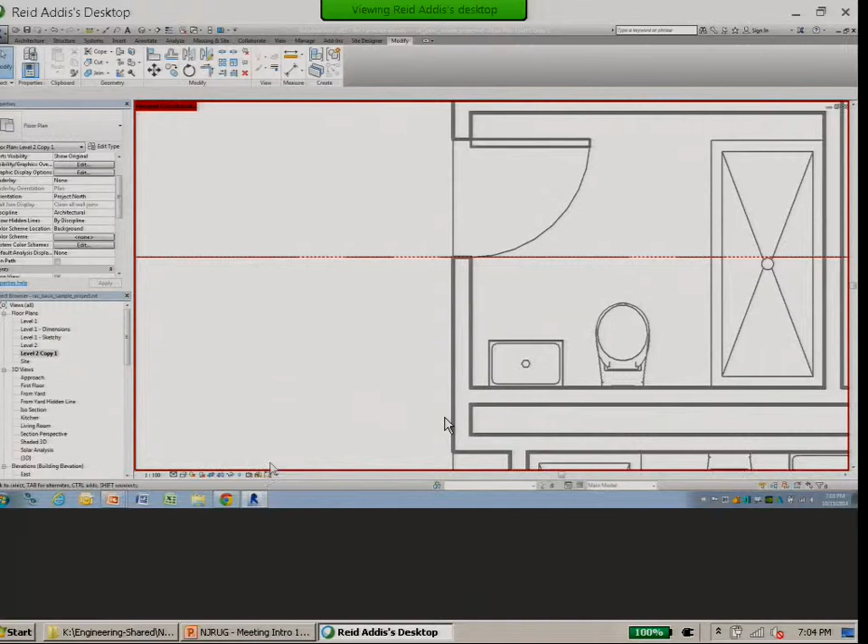But if you wanted to see what was being constrained to what, there's now a new option on the view control bar called Reveal Constraints. When you click that, it'll show you all of the items that have been constrained, using a dashed line through the screen. You can see there's another dashed line here going through, so you very quickly can see what's been aligned with what.

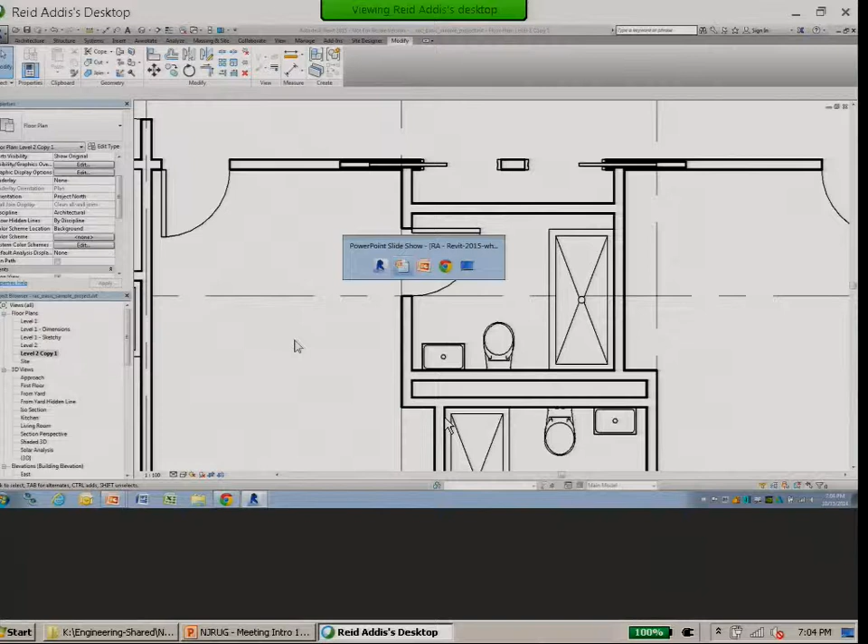So you can go in there and make those adjustments. I could say, oh, let's see what's going on here - oh, that's locked, let me unlock that so it can get repositioned. Then you simply come to the bottom and turn off that display. It's kind of nice, and may be even more useful in the family editor, though I haven't checked to see if it's there. We'll check that in a second.

Selecting host for tags - specifying the host tag for a host element for a tag. Afterwards, you can select the tag and change the host element. I'm really not sure exactly why you might do that, but let's say, for instance, for some reason...

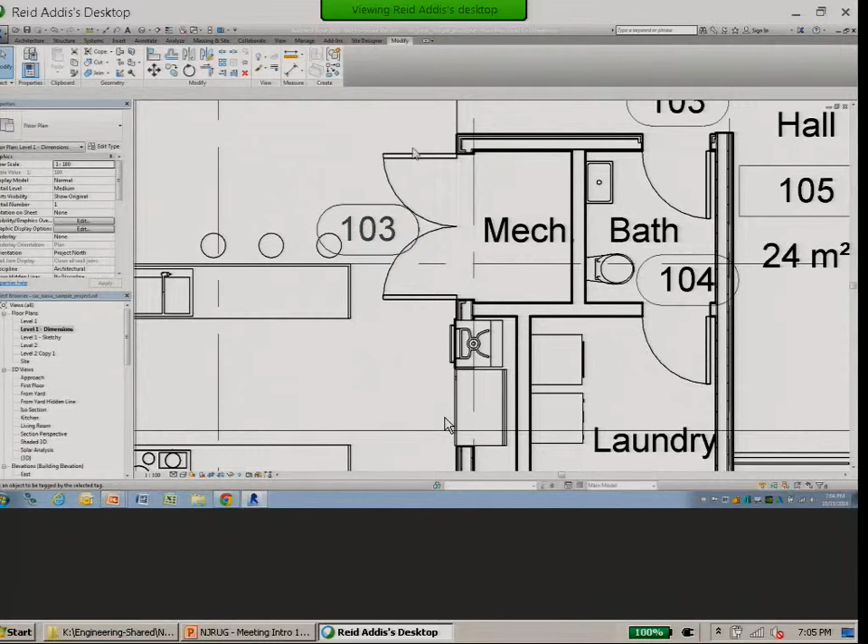I tagged door 105 and I really meant to tag this door over here, 103. So I can simply choose the door tag 105, pick a new host, pick that door, and that now updates to 103. It's pretty fast - choose your item, pick a new host, and update it. So you can switch it around if you've accidentally tagged something that you meant to tag something else next to it. That's now added in the subscription release.

Annotate treads and risers: you can specify the default properties before placing the annotation. Again, I'm not sure how many people would take advantage of this, but on the Annotate tab there's a new item for stair path, and you also have something called tread number. If you pick on the stair, it'll go through and number the treads, and you can adjust what that looks like ahead of time - there are settings for doing that.

Something else I noticed after the upgrade: when you opened a previous release of a file, you got a dialog box saying it's updating a previous release, and you weren't really sure if it was updating release 2012 or 2014 or whatever. I don't recall if there was a cancel option, but now when you open an earlier release, a dialog box shows up telling you the release of that project, and it also gives you the opportunity to cancel.

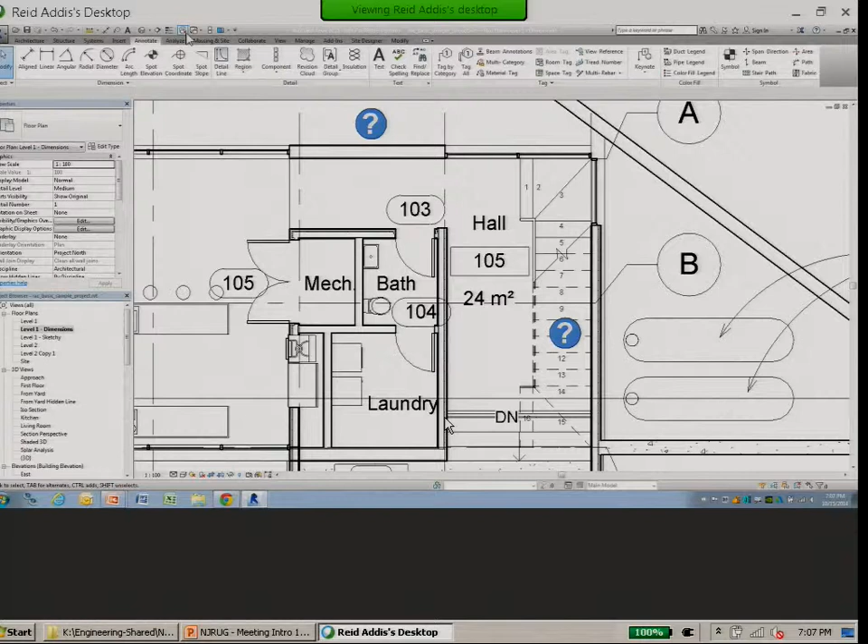The other thing having to do with families - I think the family is still open here. Yeah, I'm going to close this particular family, but let me open up that chair family again.

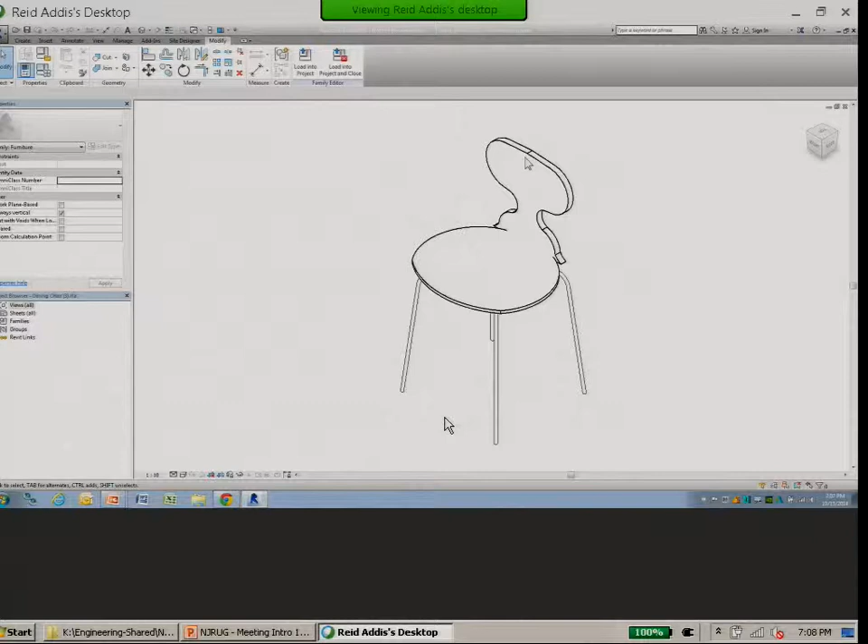When you edit a family and make changes, you'd choose reload into the project, which switched you out of the family editor and right into your project. At some point you'd come back to your pull-down menu of open views and find 30 or 40 family files open that you now had to close one by one. If you've made the change you want and want to load it into the project and close the family, there's now a new button for doing that. I can simply say load that into the project — since I'm not making changes, there's no dialog box, but the family closes and won't appear in that list anymore. Not the end of the world, but it makes life a little easier.

In the properties palette, one thing that used to happen was when working on different elements and trying to change the same property value, every time you clicked outside the palette and onto a new element, it would reset the properties palette. So if you were changing door numbers and clicked on another door, it was resetting the palette — and now it's not doing that.

Let's see if walls have a longer scroll. If I came down to walls and clicked on another wall, the properties palette used to just reset to the top, so you had to keep scrolling back and forth to get to that item. Now it holds the properties palette exactly where you left it. It sounds like a small thing, but if you're doing this all day long, it saves an amazing amount of time.

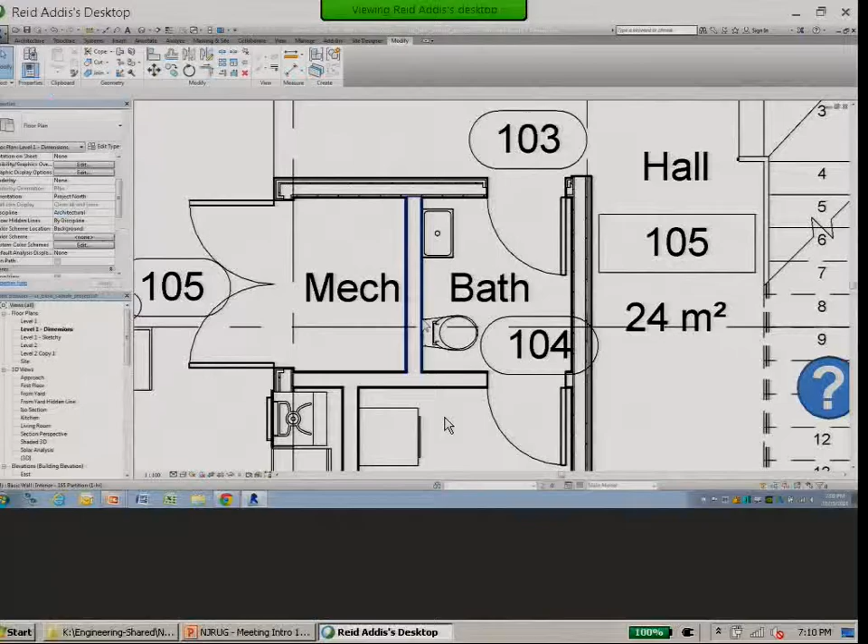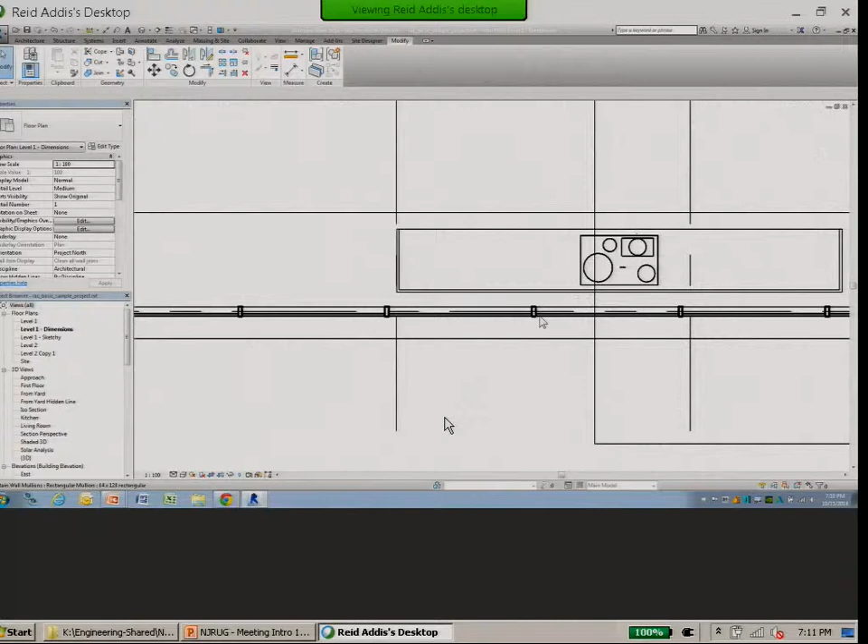Pin and unpin icons determine the relationship — select the element to see the pin/unpin tool. A different set of pin/unpin images indicates a relationship with a host, such as a curtain wall panel or beam system. If something is pinned, let's pick this item — you'll notice it has a pin, though it's hard to see since it keeps zooming. Okay, let's get back. The pinned element, when I click on it, has a little icon indicating it's different from a pinned element that might just be a grid line. Let's check a grid line — yep, that one's locked, not pinned. But a pinned element that isn't part of a system, like a beam system or curtain wall system, will have a different pin so you get visual indication of how it's working.

This one might be of interest. When linking a file together, the default option for linking Revit models was always center to center — it took the center of all elements in the file and lined them up. We always recommend switching to origin to origin, even though that origin point isn't shown, because people forget to do that when linking the model. So Revit decided to change the default position.

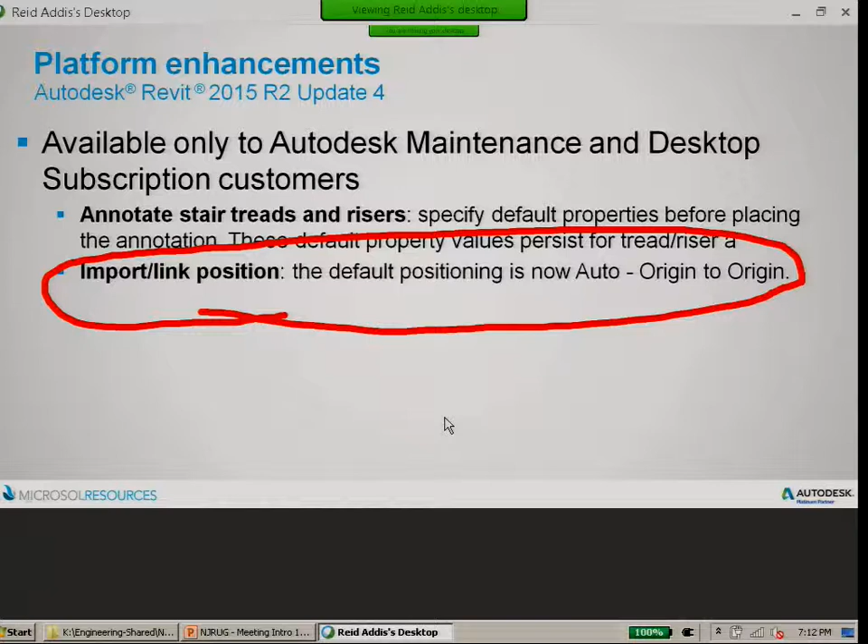So now when you're linking files, the default is going to be origin to origin. Again, it's not something that's earth-shattering in terms of big wows, but it's a fit and finish kind of improvement to make life a little bit easier for you.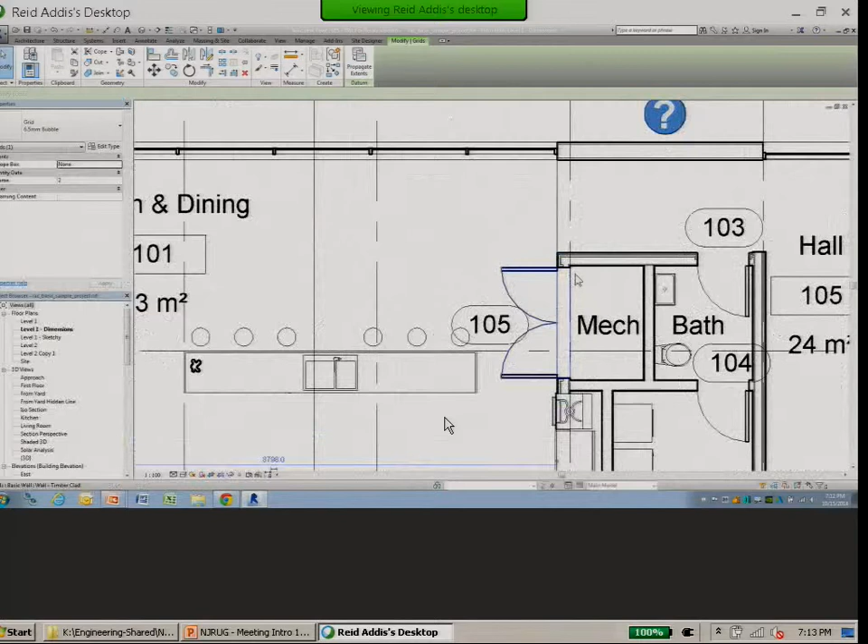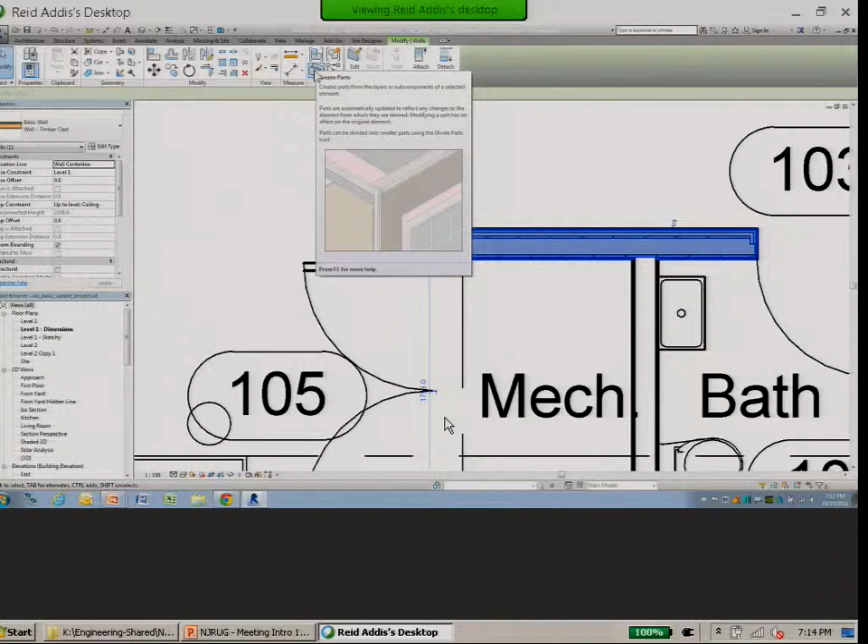Okay, so one of the things that was added in a previous release of the software was the ability to take something like a wall or a structural slab or any layered element and make it into what are called parts. So if you created parts, it actually separated all the layers of that element into separate elements. You had the ability to control their heights and the hatch patterns in them. And if you were taking this as a contractor into Navisworks and wanting to schedule it, you could schedule the individual elements. So that's what parts are.

And so they've added the ability to add surface reinforcing to the individual parts. And again, some new features in the rebar settings. Let me get back into the PowerPoint.

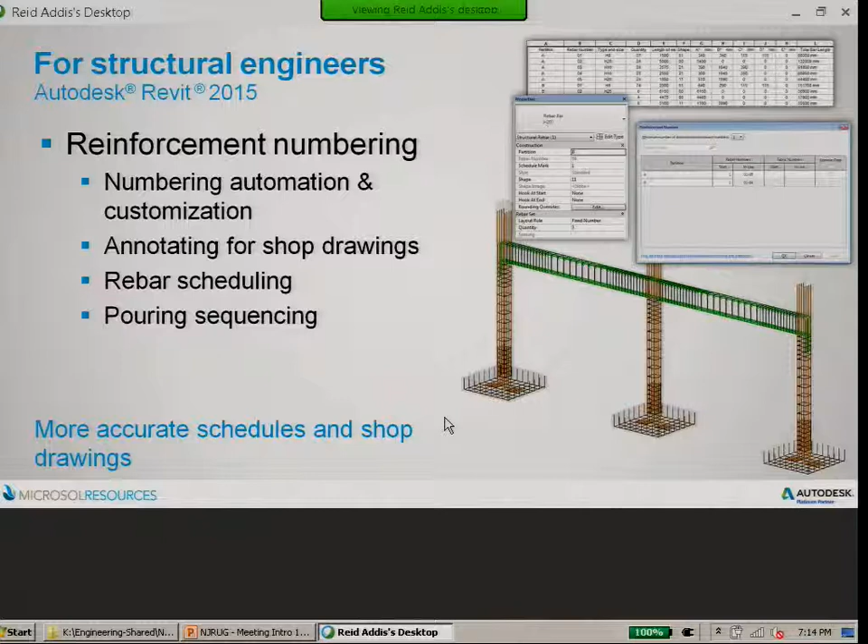You have the ability to number your reinforcing again. Show of hands, how many people actually put reinforcing in the structural drawings? No hands, right? So again, this may be more for the contractor and less for the engineer.

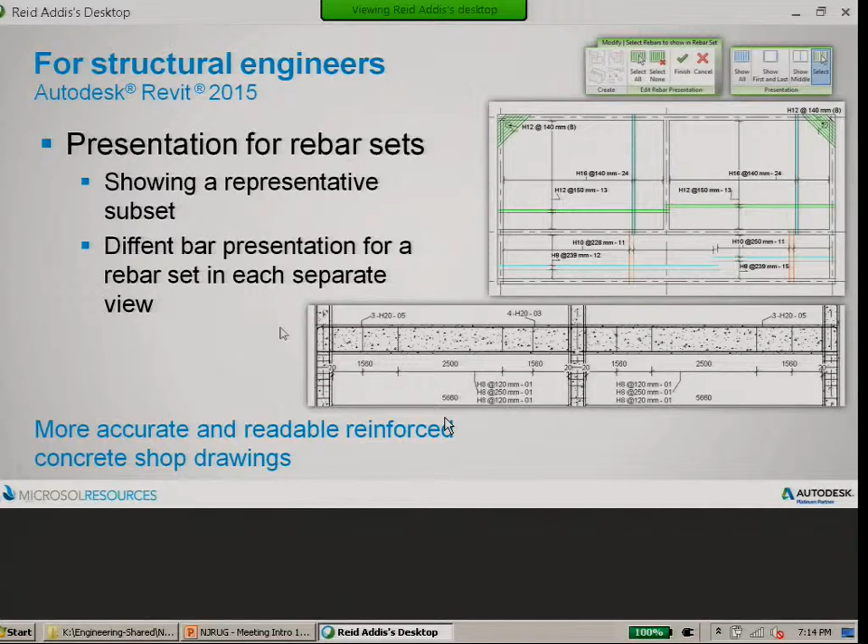Single sheet fabric placement—they've added some new tools for that, and some new presentation features for reinforcing. Multiple rebar annotation, again for greater accuracy for as-built model definition: location line, visibility, graphic justification, some more handles for snapping, setback improvements, and switching on and off the auto join feature.

There are structural section properties, catalog profiles, more accurate quantities, and analysis code added in this maintenance release. There was, again, some more rebar, so you could put rebar into 2D views, but a bunch of other items that might be of use.

So for structural elements, you can now snap to imported CAD drawings. All structural elements will now snap to the imported geometry of imported drawings. There's been enhancements to 3D snapping. Snaps, a few of them like nearest endpoint and midpoint, are now available when defining structural elements along model lines. So a few other things there that were added in this particular release.

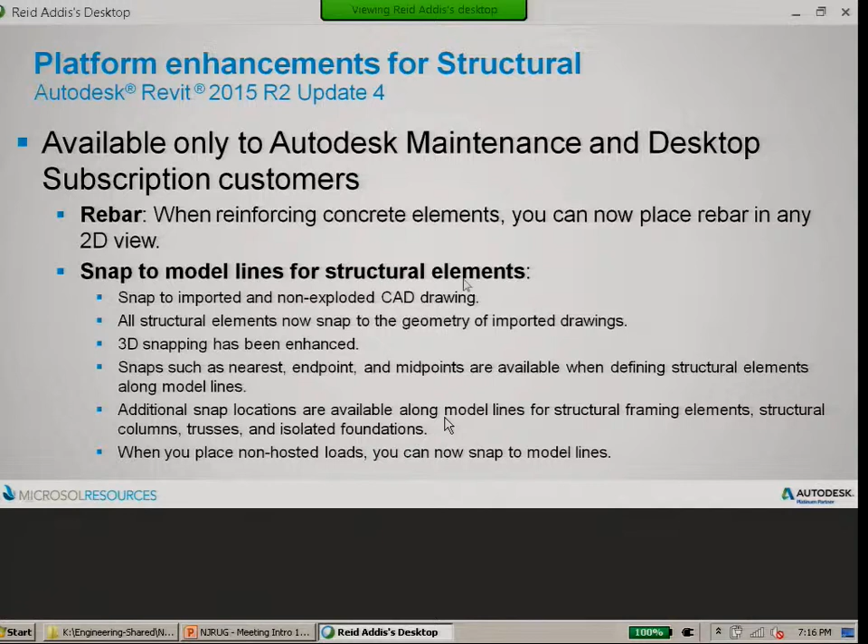This is the update release. Some more rebar stuff, right? So alignment reference of beam ends—you can now select multiple framing element instances to change their alignment. And the change reference tool, to reset the setback framing elements, there's now a new tool for doing that.

It looks like I didn't take out some of my notes. That's why that's still in there. I forgot to take that out of the PowerPoint. So sorry about that. That rebar just doesn't want to go away.

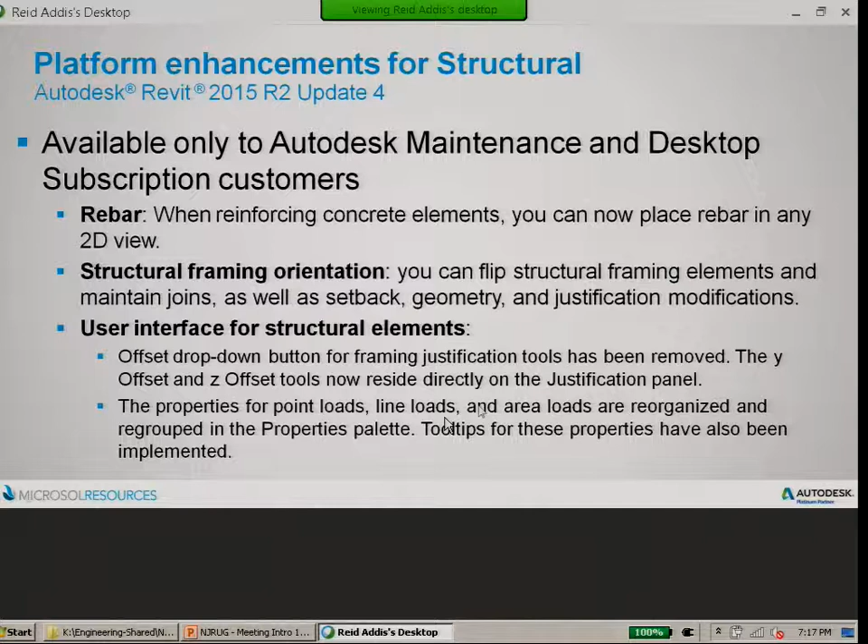Structural framing orientation—you can flip the structural framing elements. And there's a new user interface for structural elements. So there's an offset drop-down button for framing justification that's been removed, and the Y and Z offset tools are now on the justification panel. And the properties for point loads, line loads, and area loads have been reorganized and regrouped in the properties palette.

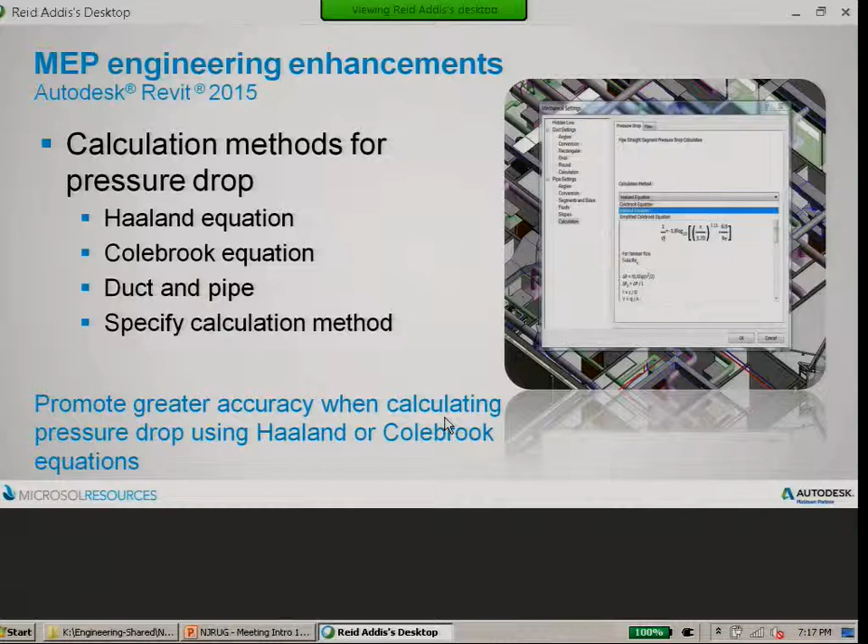And analytical properties have been reorganized and regrouped. Oh, it looks like I left that alone. Okay, calculation methods—there have been some additional methods added in this particular release for MEP.

Tag values before and after the tap. It sounds kind of simple, but prior to 2015, when you had a tap in a duct line and you reduced the CFM flow, Revit really wasn't able to recognize that. So whenever you tagged that duct, it just tagged it at the maximum flow. Now it recognizes that there's been a reduction in the CFM in that particular section of the ductwork. I think that was a big improvement.

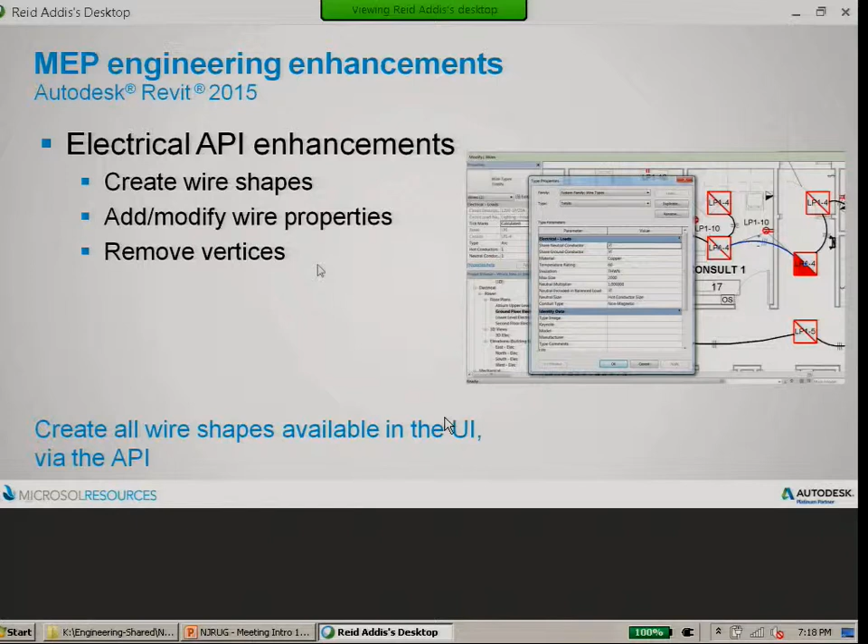There have been enhancements to the API for electrical, so if you're doing programming, you can make some adjustments to that particular item. There have been some additional country-specific content added. More importantly, in the subscription release, they've added sequencing for power circuits.

They also allow you, when you're creating a circuit, Revit automatically connects to the most recently used panel for the current session. You can move a circuit directly to a target slot without disrupting the other circuits. And there's ASHRAE table information that's been added.

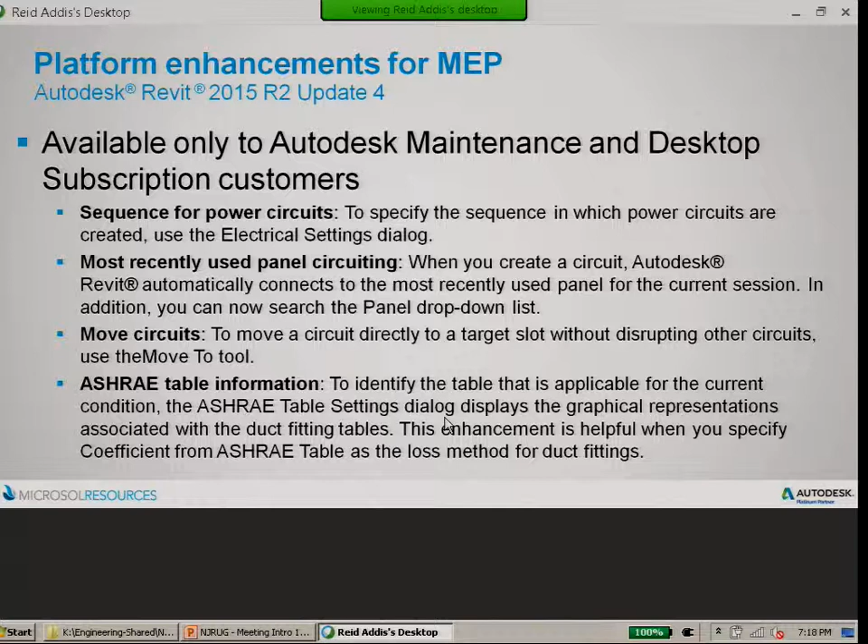So that is the enhancements. And then we'll open it up for questions.

I'm going to show you one other quick thing that may not have known from the previous release. Let me go back and see what I've got in terms of views. Let's see if I can open up this approach view. There we go.

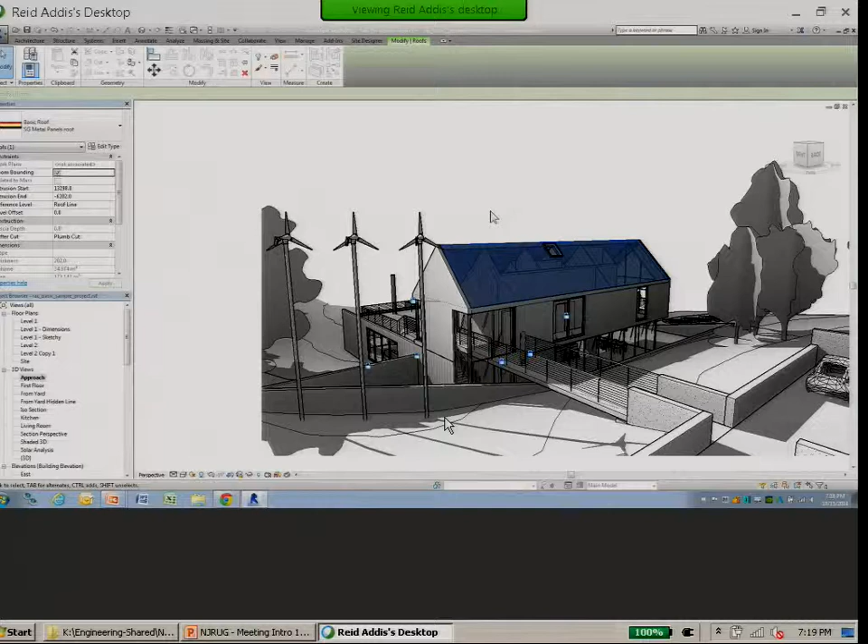So one of the things that was added in the previous release of the software, and again, it may not be a big deal in your model, but you have the ability. I'm going to just duplicate this view and call it approach, then right click and rename that, and we'll call that exploded.

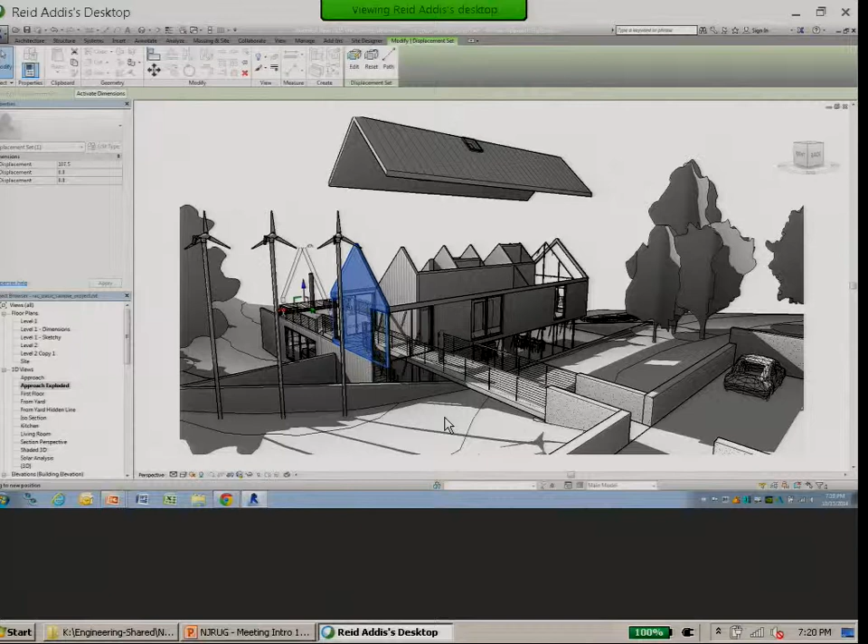How many of you have actually played with moving the elements around in your 3D views? So I can pick this roof and use this tool right here to displace that particular element. And I can pick this wall and choose to displace that element too. So I can move this over here, maybe move it out this way, maybe move it up here. It starts getting a little spooky, right?

So if you go back, well, what did it do to my model? It didn't do anything to the model, it's just in that particular view. And you even have the ability to add path lines, to show where it actually came from. So that was added in the previous release, and it's kind of an interesting way to deal with a model rather than trying to create multiple views on top of each other. You can actually just start to take the model apart.

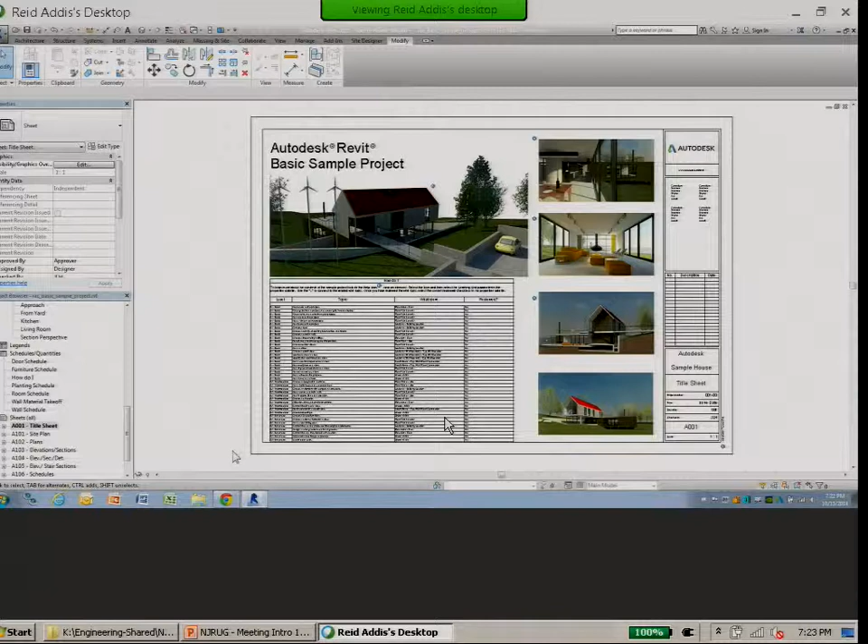Does anyone have any questions? It's a quiet group, right? It's sort of like all engineers. So yeah, I've done training sessions - I guess I can say this politically correctly - it's all Asian in the room, and you can't ask a question because no one is going to answer in that particular situation. So I learned basically what you say: okay, what is the answer? So I used to point out. But thank you for attending and being so graciously attentive. Great. All right, okay, thank you. Thanks very much.